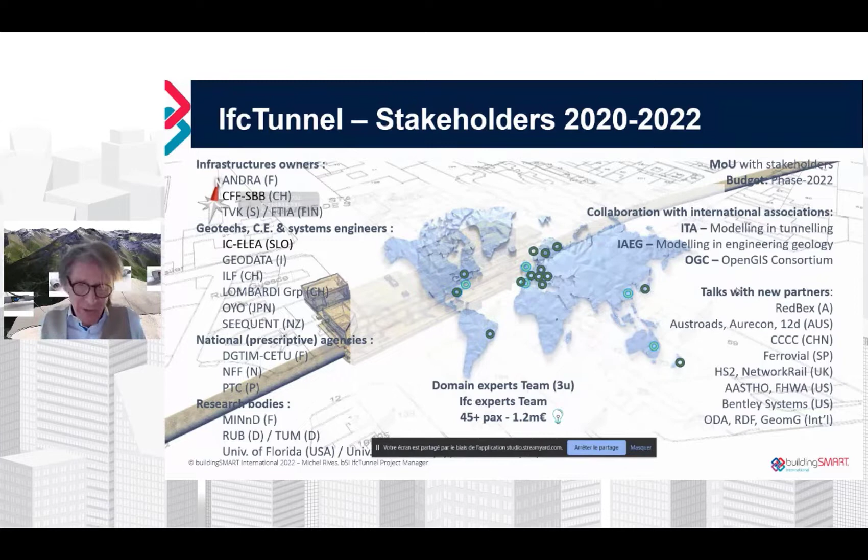I did a quick math to assess the amount of work we put into this project, and I think we are close to 1.2 million euros altogether. That gives you a sense of the effort we've put into this.

We assessed our scope on the basis of use cases, and those use cases cover where exchanges of information happen, both in terms of describing the subsoil or the lack of understanding of the subsoil, the design phases themselves, the sequencing of operation, the issue of tenders, the construction processes themselves and their monitoring, and the handover to asset management.

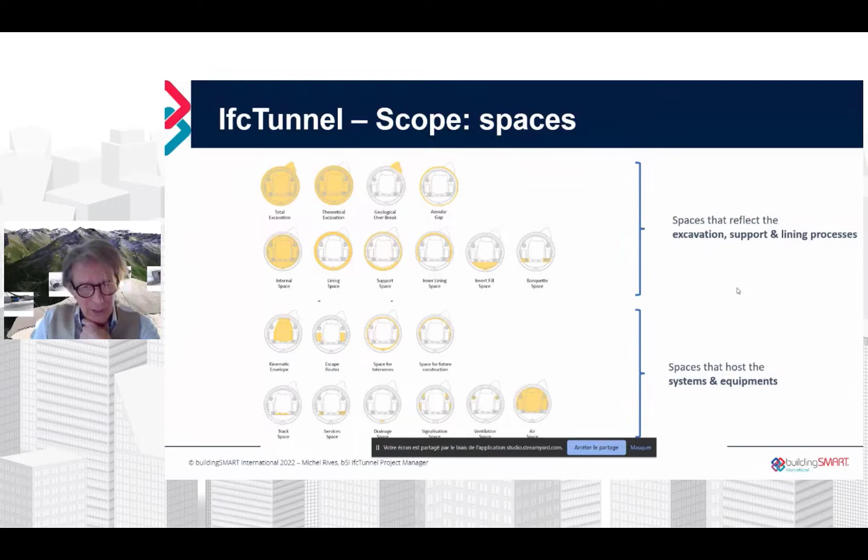So these are the basis upon which we define our scope for the three disciplines I mentioned earlier. The first thing that came to mind was to define the different spaces into which we have to organize the project. These spaces may result from the extraction or excavation process itself, or they may be planned as reservations for the different systems that have to be installed to operate the underground structure.

As I said, we have compiled the requirements of three disciplines. So all in all, you could say this is in fact three projects that we run in parallel. But I would add there is a fourth project we run, and that is the coordination between those three disciplines. Because what this project is very much about is to facilitate, to ease the exchange of information between geotechnicians, civil engineers, and system engineers. And that has proven to be difficult so far.

So we really have tried to understand the expectations and the constraints of the different disciplines so that each other understands well why it is important to provide that information.

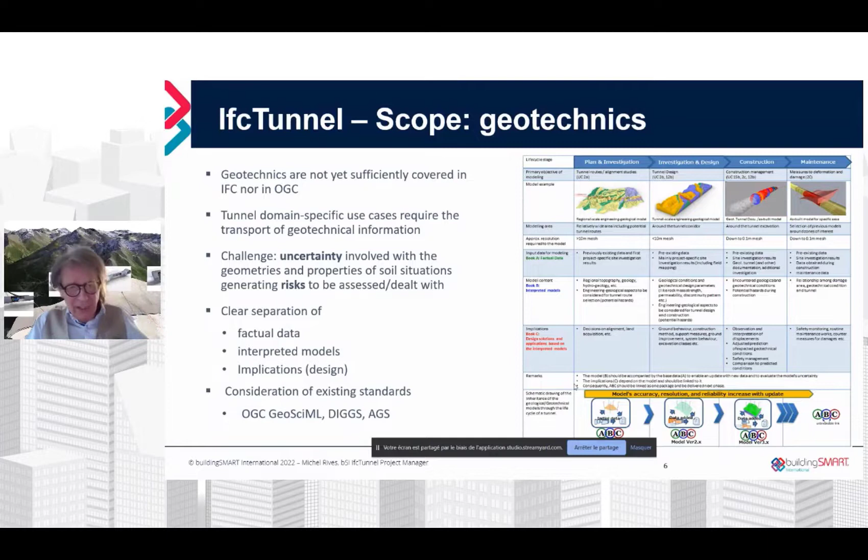Next to this, we've considered existing standards that either the OGC or other organizations have produced over the years and are being used. So we need to make a link to these.

As far as the structural design itself is concerned, we clearly decided to cover everything related to excavation, done through TBM, tunnel boring machine, or through more traditional drill and blast methods, and things that cover the so-called cut and cover structures. So this is the scope for the structural aspect of things, both in terms of what is built and how it is built, construction methods.

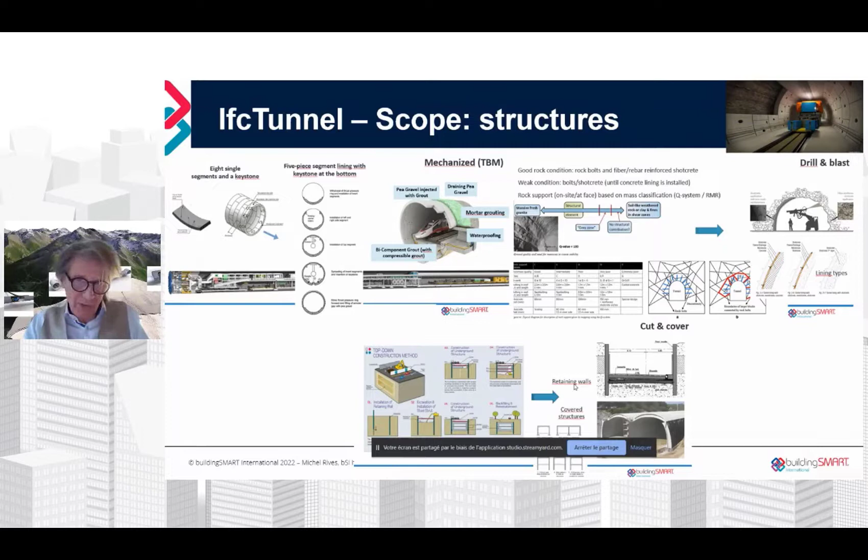As far as the systems that equip those tunnels are concerned, you have them listed here, and Heiko will be covering that later on. Everything that relates to ventilation, drainage, dewatering, fire protection, power provision, and safety and evacuation. So that's the global scope of our project.

As a consequence of the requirements expressed there, we needed to provide a few extensions as well in terms of the geometries. André will cover that. Basically, we wanted to make sure to describe properly the transition, the non-linear transition between cross sections, something that is required for tunnels, but is required as well for bridges.

So we are serving the bridge team here, the Building Smart bridge team, as well as those 3D grids, so-called voxels, which help describe a situation whereby the subsoil, for example, doesn't have a well-defined continuous limit to a particular characteristic. So the characteristics there are described through values embedded in the cells that make up the 3D grid in question. And that's a very neat way to describe things that are uncertain to some degree.

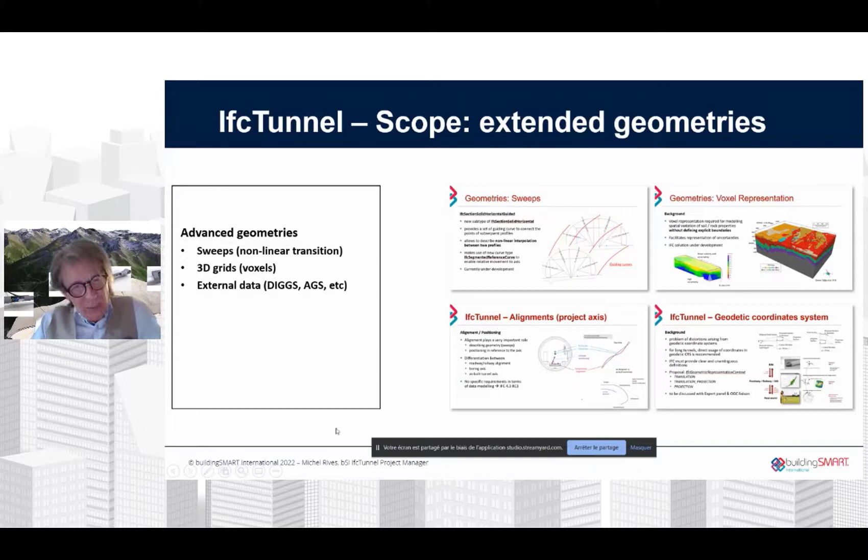That serves, of course, the underground structures like tunnels, but it serves as well foundations, deep foundations like for bridges, and deep foundations for buildings as well. So this is a rather broad, positive impact on the different disciplines. And last but not least, this idea of linking external data is something that exists today to some extent in IFC, but we want to extend it to make it more efficient. So that's another addition.

When we put those requirements together, we ran a series of national consistency checks with national industry associations, national tunneling associations. We ran this in 10 countries and got over 200 comments or suggestions.

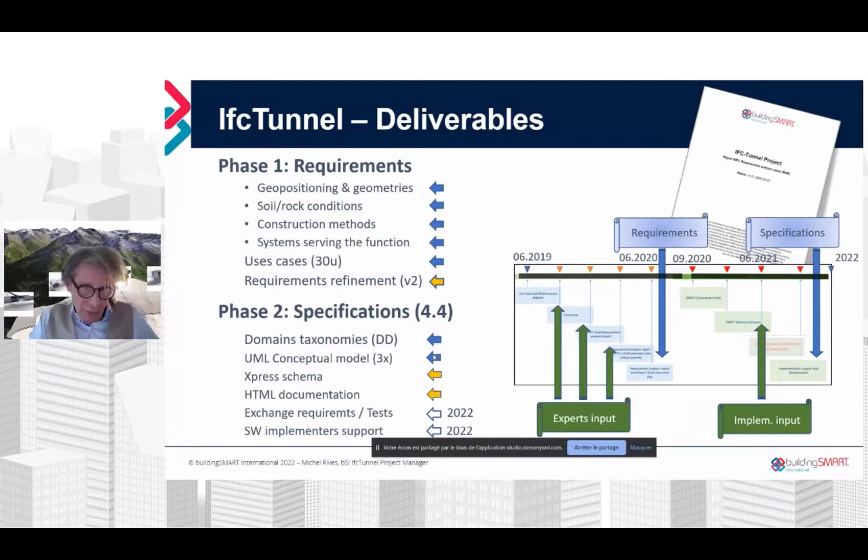As far as the deliverables are concerned, very happy to report, and this is the main topic for today and tomorrow, the conceptual model for the 3 disciplines in question that we have just polished. We had the first version by December, but we now have a consolidated version, and this is what the domain team and Lars will be taking you through. This is very consistent, but it's important to know what we have now in this conceptual model. It's been developed in UML through the Enterprise Architect platform.

This is available, and again covers all the geotechnical situations, the uncertainties associated with it, the mechanized and drill and blast excavation processes, the support and lining techniques that are used, and the different systems that equip. So all this is part of this conceptual model.

And of course, the extensions that I was referring to, but altogether, we've tried to leverage as much as possible from what was existing in IFC 4.3, and came up with a certain number of extensions that will be part of 4.4. We did a little math to compare the number of domain concepts that each of our 3 disciplines have produced compared to the railway project, which was a rather large project. You can see that this is somehow equivalent in importance, just to size the amount of work behind this project.

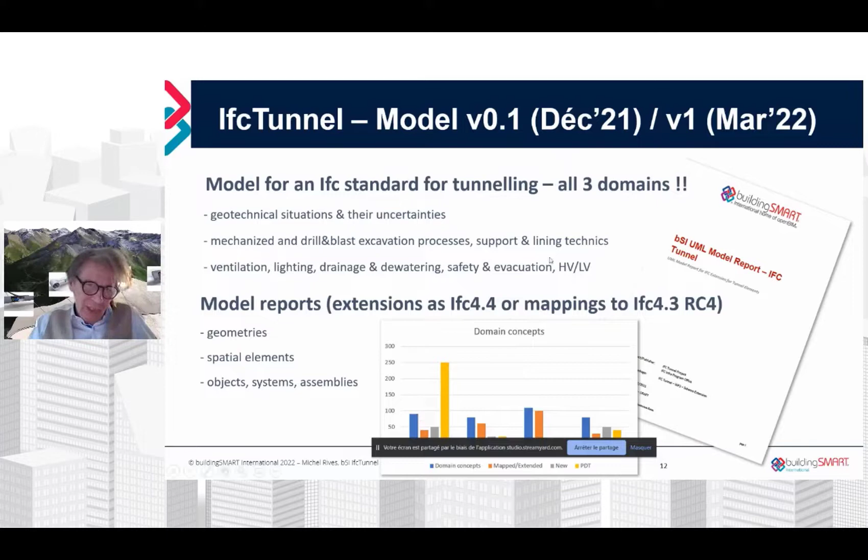So once this conceptual model is ready and presented to you, we will concentrate on producing everything that software developers need, like the express schema, things that can help with preparing the translation, and automate the input to the BSI, BSDD.

This is mainly a services platform to link classifications with the conceptual model, and prepare the different exchange mechanisms on top of the so-called alignment-based reference view, MVD.

We have as well a formal approval process within Building Smart International, and that has in a sense already started, because we've had a series of technical discussions with the SCTE committee, which makes technical recommendations for us to improve our model. We've taken their advice into consideration and integrated their wishes. So I think we are in good shape now.

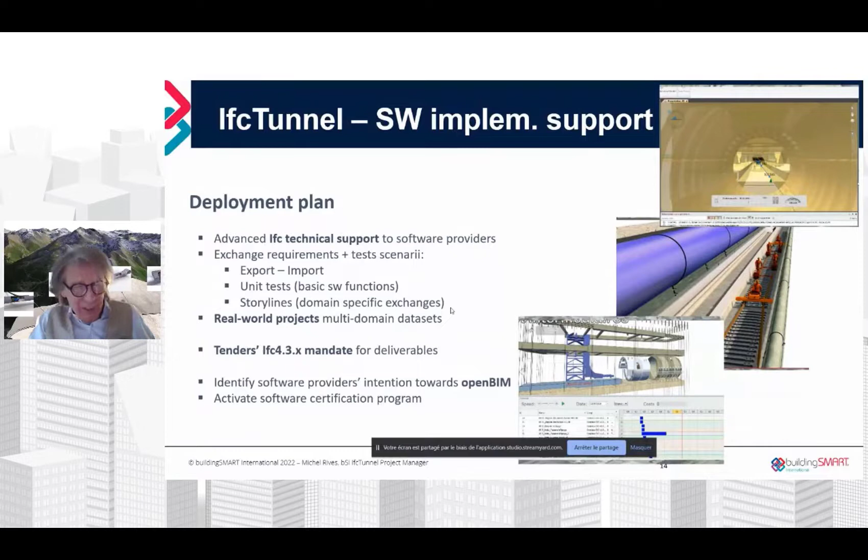And the last bit will be around preparing test instructions, data sets to help with the certification process, and of course working with the software developers by providing the data that is needed, real-world project data needed for ensuring unit tests and storylines, a bit like the railway and roadway teams have done in the past.

With that, I think I should hand over to André, and just remind you that after André, you'll have this sequence of presentations: geotechnics, excavations, and systems. We can refer to the expert panel tomorrow, which will deal more with the geometrical aspects of things. So André, over to you.

Okay, so hello everyone, also from my side. My name is André Borrmann. I'm at the Technical University of Munich, a professor, and at the same time I have the pleasure to act as the technical lead here in the IFC Tunnel project.

Let me first give you an overview of the process of IFC extension development. We typically have two different groups, and we also have them here in the IFC Tunnel project. On the one hand, we have the domain experts. On the other hand, we have the IFC experts, and they work closely together. So typically, we start with capturing the domain requirements in a requirements analysis report.

This is what has been done here as well. And then we define more precisely the data requirements, and this is still the task of the domain experts, typically represented as an extensive taxonomy. This is then the input for the conceptual model that is being designed. As we said, we use Enterprise Architect for that.

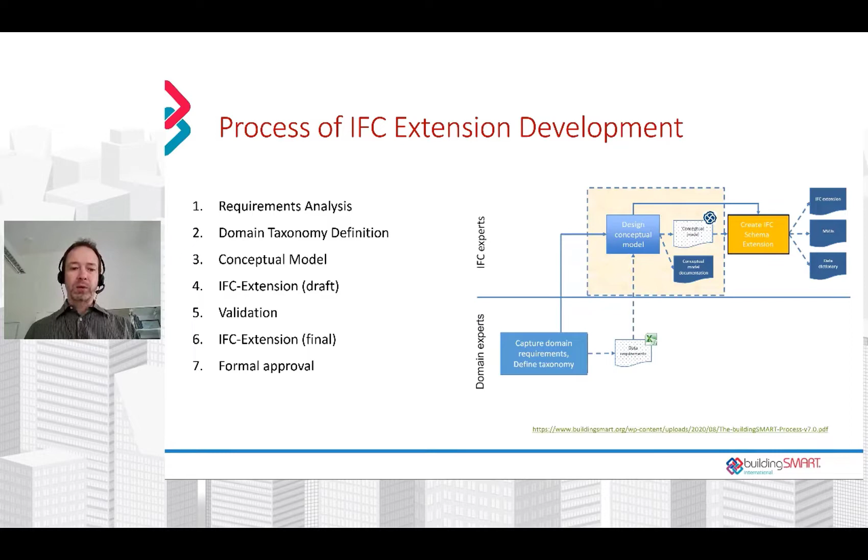So Michel highlighted this already. We started with an extensive requirements analysis report published in July 2020 with around 170 pages, where we documented in detail the use cases, the processes in tunnel design and construction, the associated data exchange scenarios, and then came up with chapters highlighting specific aspects like georeferencing and additional geometry, the role of alignment, but also a very detailed description of specific items in the different domains - geotechnics, systems, and excavation structures and lining.

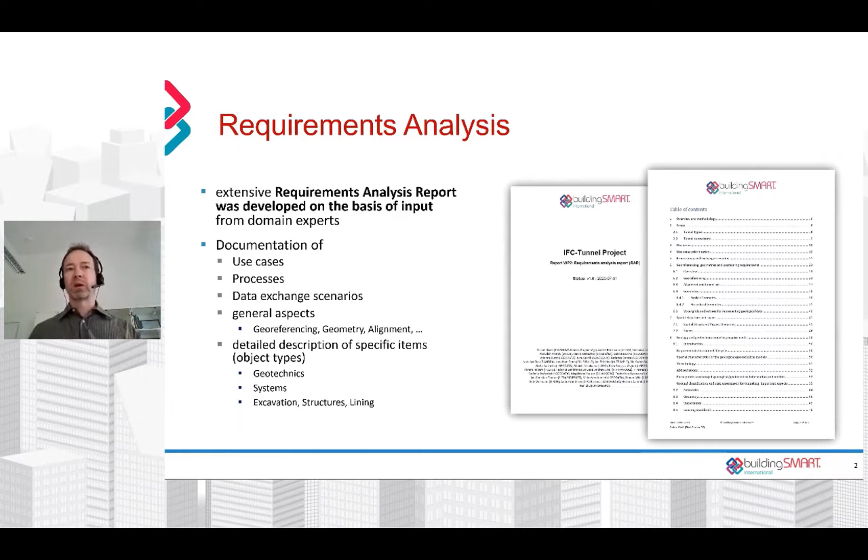This was the basis for our domain expert groups to continue their work, and they came up with comprehensive and structured compilations of the object types in the domains and their specific properties. We see these Excel sheets that have been produced, which were really helpful, and a lot of work went into them. During this process, international standards, national classifications, and object catalogs have been considered - I mentioned one from France, and also one from Germany, that have already created properties and object types.

Now having a look from a more technical point of view, we use these taxonomies and the requirements analysis report to come up with a UML model using Enterprise Architect. We make use of the UML modeling guidelines that have been developed in the infra room and also used in the railway room. From this Enterprise Architect model, we can produce UML reports that have already been created and handed over to SCTE, for example, for review.

But we can also create XMI and use this export as input for IFC-Doc. IFC-Doc is the tool we use to define the extensions of IFC. Everything we do there is hosted on GitHub, so everyone can see it, raise issues, and provide comments. From IFC-Doc, the Express Schema extension is created, and the HTML documentation is created, and we will do this several times because typically we are not done in only one iteration - we need several iterations.

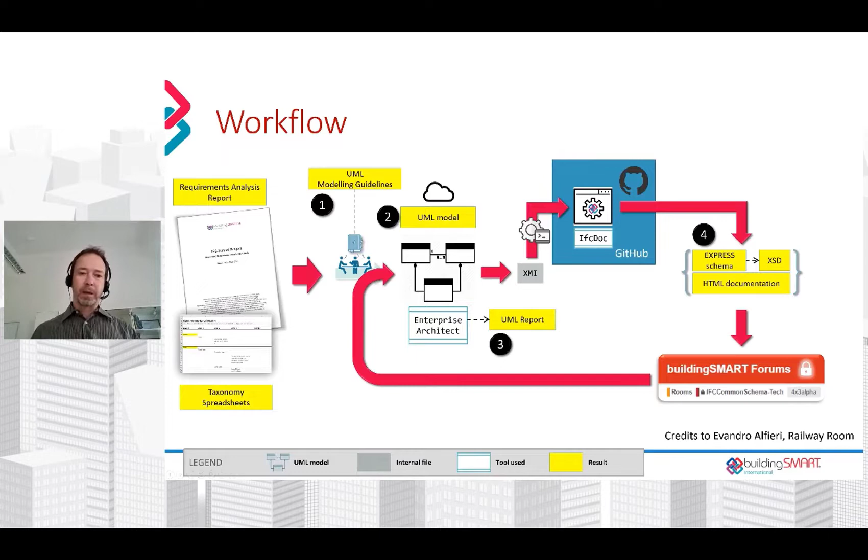So we are now already quite advanced with respect to the conceptual model - I'd say it's around 90% complete. The conceptual model is based on UML, Unified Modeling Language, which is the standardized graphical notation for object-oriented data models. We use it roughly in the way that, first of all, we directly model all the domain entities in UML and mark them as so-called virtual entities.

Then we decide to map these new entities either onto existing IFC entities, or at some places we decide to create new elements. Of course we have to be very careful because we don't want to grow the IFC schema endlessly, but still, here and there, we needed new entities.

As I said, the conceptual model is 90% complete. What we have done already is to model geometry and spatial structure, geotechnics, the structures, and the systems. Here and there a few elements are missing, but that can be completed very soon. The idea is to finalize the work on the conceptual model within the next days or weeks. So we have around 25 new entities, 50 newly defined predefined types, and around 250 properties that have been captured.

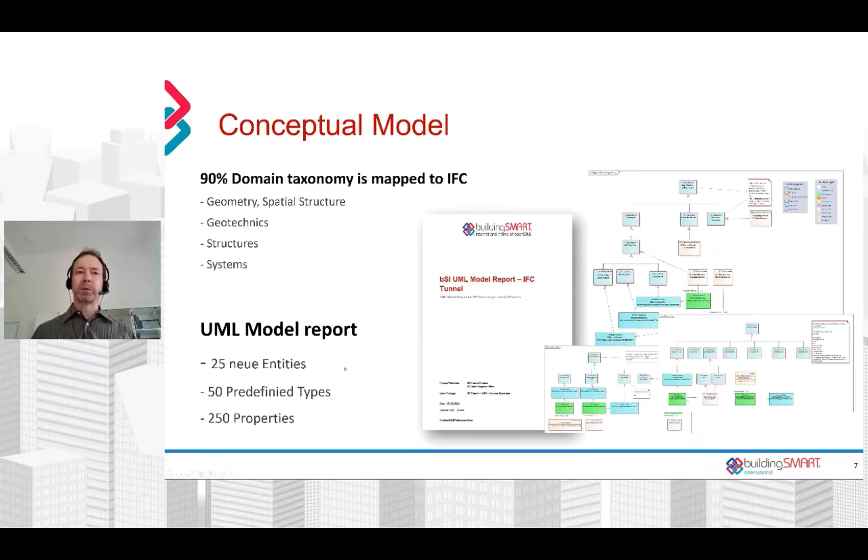So the conceptual model is now the basis to do the next step, the actual extension of the schema. We use GitHub quite intensively, the BSI InfraRoom repository, where you can follow all our work. We use this to discuss with other experts like the BSI bodies, the international community, but also to exchange with experts in the expert panels. You can use these links listed here to directly access the repository.

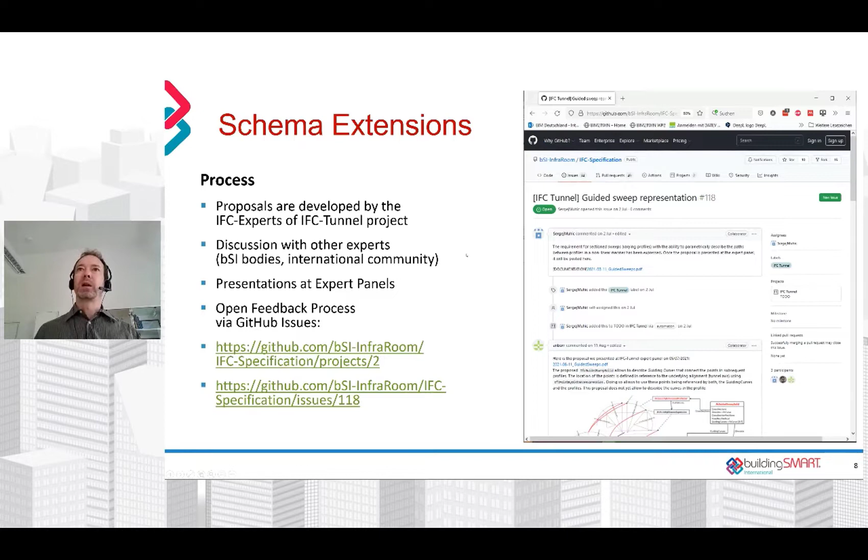So what is the schedule for the overall project? We started in 2019. Then in summer 2020 we delivered the requirements analysis report, which was a lot of work to compile all these requirements. Then both the domain groups and the IFC experts started the conceptual model development. We had the very first alpha version at the end of last year, and we will deliver the final version of the conceptual model very, very soon.

So now we have already started with the schema development. We will continue to do so until, I would say, summer or early autumn this year, and then would have a first candidate standard for IFC 4.4, which will include the extensions for IFC tunnel. And then we probably will have a deployment project where we help and support vendors in implementing these new data structures, giving them support for that.

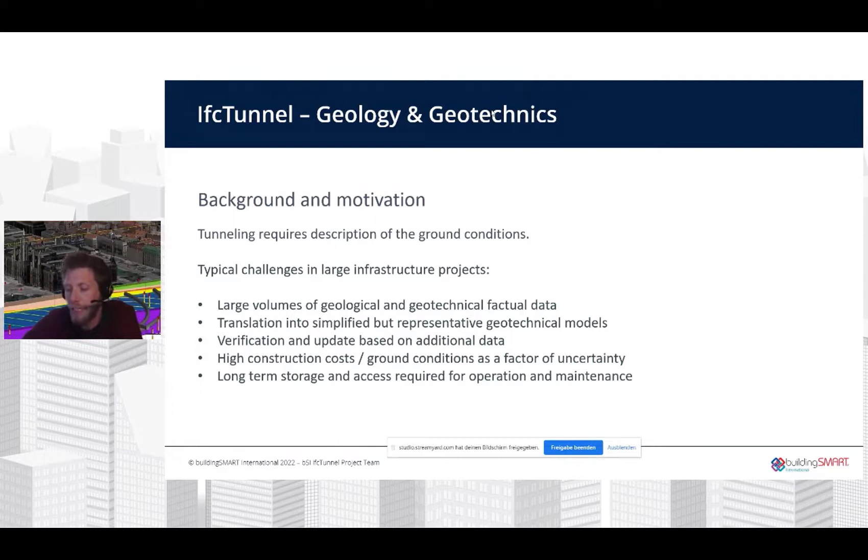During that time we gain even more facts, more documentation and information that we need to bring into the model and compare it to the prediction. Why is this so important? Of course, the ground conditions, due to this uncertainty, are a major factor of uncertainty for the whole project regarding costs and project time. So for this reason we need efficient ways to deal with all these challenges.

We heard a good introduction about the IFC Tunnel project and our activities. From my side, just a bit more focus on our tasks. The requirement analysis report that Andre just mentioned included a detailed description of the use cases we are going to support.

We almost finalized the conceptual model, as Andre just said. This schema extension, our work, also includes some concepts to deal with uncertainty, which as I said is a very important fact for us. Regarding geometrical representation, something quite new for IFC will be the voxel models - we're going to talk about that. And for us, a major challenge or requirement is to define a good link from a model of the ground conditions to the design. I will show you the concepts we have for this in my following slides.

Regarding the input, some brief overview - maybe you saw this in previous summits and presentations. We collected input from many existing standards, and one very important source for us was the standards by OGC. There's still a back and forth with this. This is something from the requirement analysis report where we described what was already covered and where we see a need to extend the data schema. We did the same analysis for the existing schema extension from 4x3 for geotechnics, where we still see some gaps that we would like to have filled for tunneling applications.

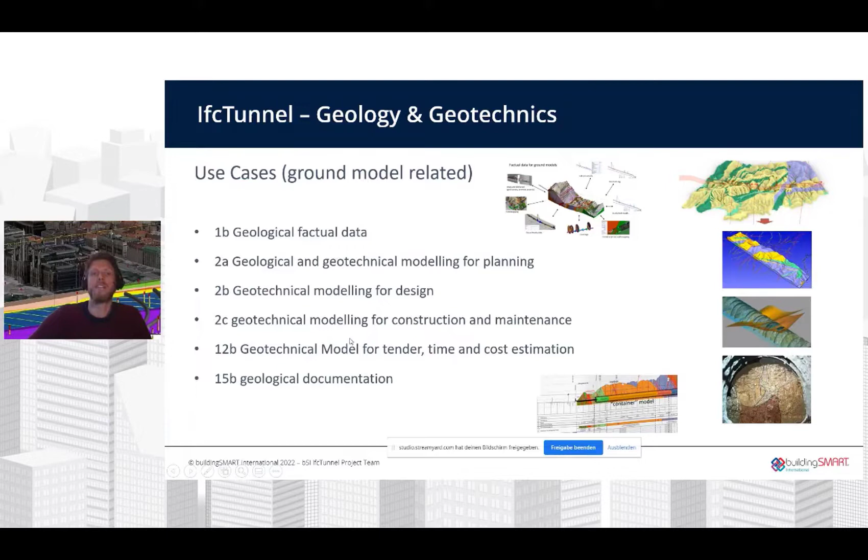To repeat it quickly, we focus a bit on geofactual data. I will explain later why this is so important to you. And then we have several use cases throughout the lifetime of a tunneling project. I would like to summarize this with some examples in the following slides. Very important for me now is to show the focus.

Based on this use case descriptions, what do we think are the essential needs for the schema extension? Very important is the support of factual data. Factual data for us are any observations and measurements regarding geology and geotechnics. So it can be lab test results, borehole data, any other kind of test results that are collected, field mapping—anything where we have confirmed knowledge that we need to localize in our model and that we need for further assessment.

And why do we think that IFC would be a good option to produce or exchange these data? We think there's no existing established standard that carries both the geometry and the semantic model and properties to these observations or to these geometrical objects. So we think having IFC as a tool for this would be very helpful for importing the data for further interpretation and also using existing software for visualization.

So we need a base for spatial assessments and visualizing this data so that we can continue working with it. And of course, we always need to show where the confirmed information is.

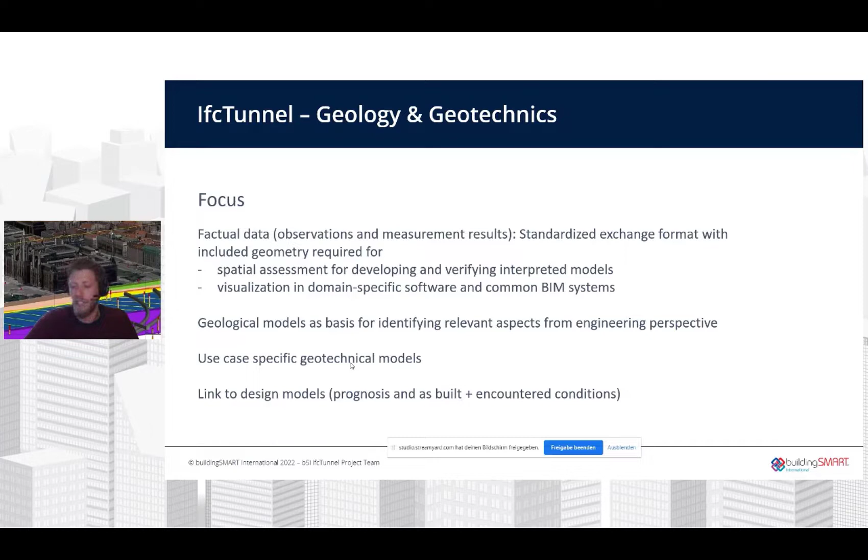Starting with this overview—as we just heard, factual data are most important for us. They show us existing knowledge. This can be geophysical surveys, boreholes, test results from different sources, in situ testing, lab testing, field mapping data, and a lot of existing literature, maps, and so on. All of this is compiled to form our interpreted models that fill our model space, for example along a tunnel corridor.

We see here geological units. We see major fault zones that have been modeled along this alignment. So these models describe the ground where our project is located.

But in the next step, we need to relate this to the design itself. So we see here an example. The classical approach to this is a longitudinal section—that is what is commonly produced by geologists in a tunneling project. Once the alignment is fixed, or once there is at least one alternative for the alignment, the geologist would draw a longitudinal section and describe the major features that are relevant from his perspective, maybe fault zones, contacts between different layers, and so on.

What you usually include in such a prognosis longitudinal section is a band—a line below the drawing that indicates the key properties along a certain part of the alignment. And we are going to adopt this approach in a BIM model. So we say we can split the alignment into certain intervals based on the expected geological, geotechnical conditions, and then supplement this part of the alignment with attributes that describe these key factors relevant for design at especially this part of the alignment.

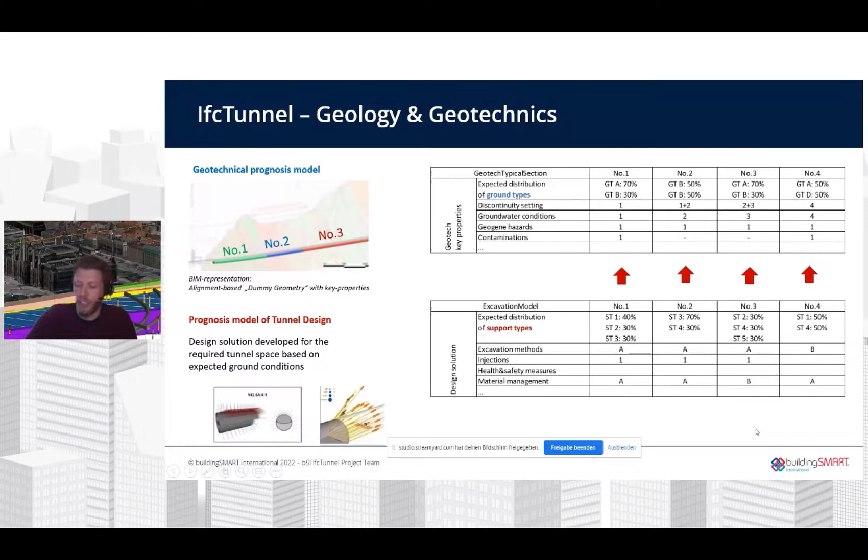There might be gas occurrences somewhere, and this can be described efficiently with such a model of zones along the alignment. The designer can have a corresponding model that can be used for a cost estimate, that can be used for any permit, and that can be cross-checked against the encountered conditions. That's the next point for us.

Once the project has started, we collect a lot of information. Usually you have geologic documentation during construction, so everything you predicted will be checked now. For every round you blast in a conventional tunnel without TBM, you might document discontinuities, groundwater inflow, and the distribution of certain materials in the tunnel face. This can be checked model-based against your prediction model.

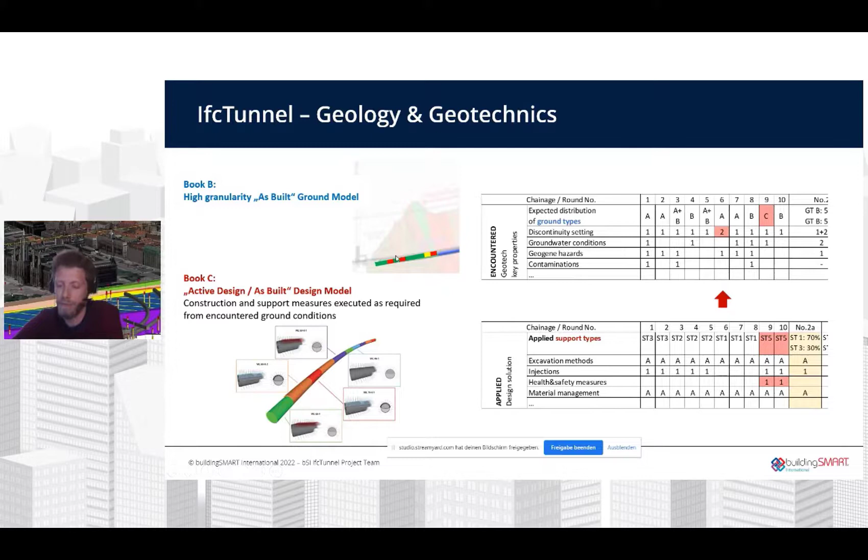And you can easily compare expectations versus encountered conditions. Of course, the same applies for the design. Based on these conditions, certain support types are installed, certain measures are executed, and the design model develops along, the as-built design model develops along with the as-encountered geology model, let's say. So this is describing a workflow that we have in mind.

This brings us now to the requirements for the model schema, or the conceptual model. This model is generally subdivided into two parts. We distinguish factual data described in Book A, that's our working term — so everything that is measured or observed and included in the model belongs here. Then we have Book B with interpreted models, with layers in between these points of observation.

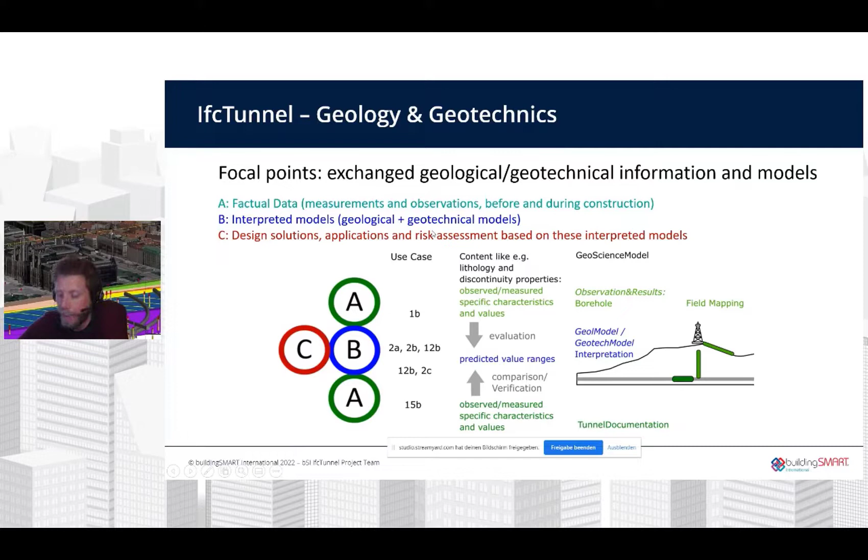As we just saw, Book B and the essence from Book A and B can be linked to Book C, which includes the design solution, and is also the place where risk assessments and things take place, because they are related to the building already. So that's our starting point. I'll briefly list the key elements that we expect for Book A and B before I hand over to Lars, who shows you how this looks in the conceptual model.

For Book A, we started with a collection of domain-specific typical types of data. Typical information we receive in a tunneling project has been subdivided into classes and is covered now. This includes objects that need to be related to a certain geometry, and others that are just semantic elements, like for example test results. We can have many test results related to one sample, and the sample might have the location, but the test results have to be linked to it.

One important point for us is that we are dealing partly with very extensive data sets, partly with well-established comprehensive standards for exchanging this information. We need an option to link external data sets. This applies especially for very big data sets, like very detailed logging data with geophysical methods, or machine records from drilling rigs or drilling jumbos in tunneling, so borehole data. We don't want to bring all information into IFC, but we also need a chance to link external things.

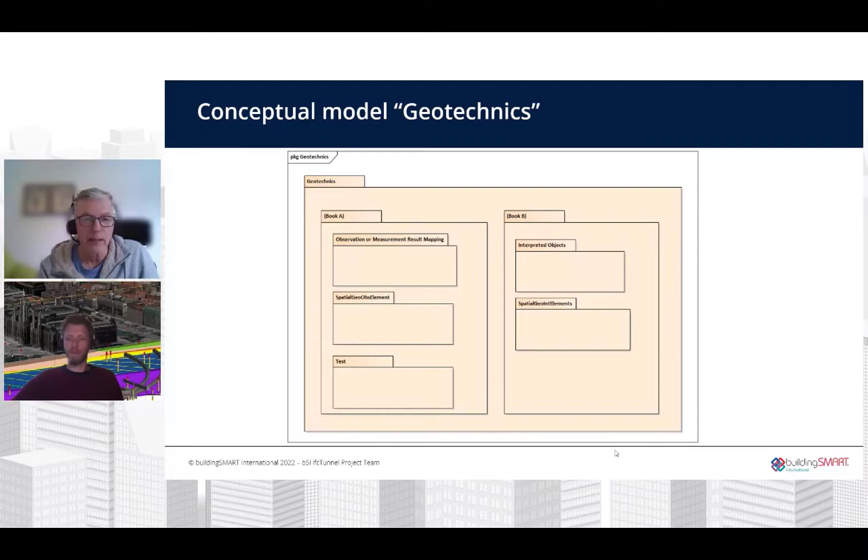And you can click a couple of times, Jonas, there is, I think, some animations here. So this is just to give you an impression on how to read these UML diagrams.

So we take the next slide. Yeah, sorry, this is very, very small, I see now.

So from Book A, you have certain containers that carry the information, for example about observations. And in there you have, for example, boreholes. IFC borehole is something that already exists in IFC 4.3, but we introduce maybe a slightly wider meaning, since it now can be the carrier of these observations.

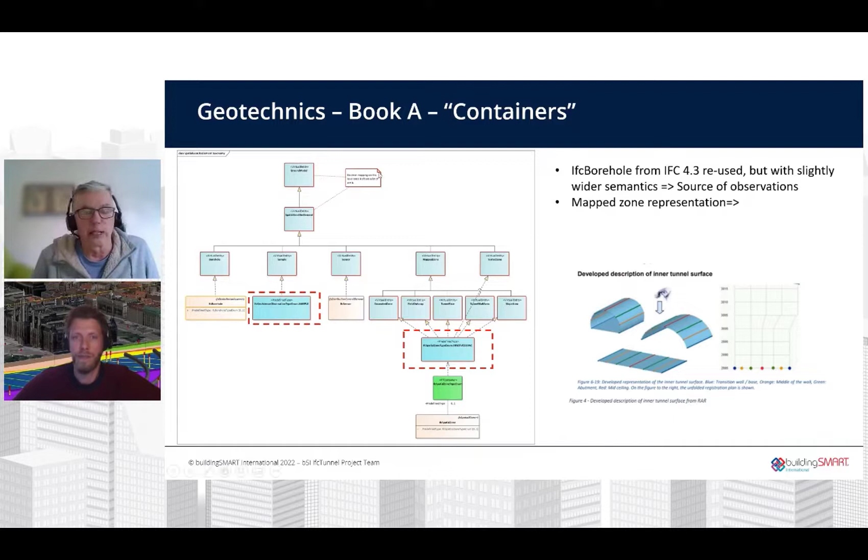There was one thing I was trying to add here for the borehole. For borehole, we might have very extensive data sets that we cannot push all into the IFC file, as we agreed. So we are going to support 3 options. We can have a very simple representation in the model, like just a shape of the whole borehole and reference to external files, but we can distinguish observations on the borehole.

This could be interval representations, and these can either use property sets defined in the IFC schema, a very simple one for general logging data. But we are also eager to link this to more sophisticated existing ways to transport logging data, and use it to link existing files like AGS files or any other file that describes these observations along a borehole for a certain interval or a certain point. Because we know there's so much existing standards with very extensive data sets, we are eager to have this option supported.

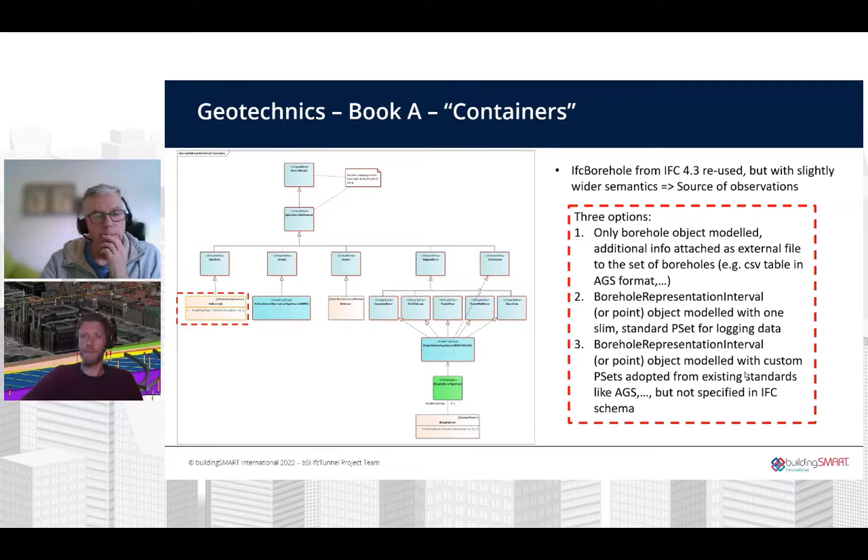And then I jump on. So quite small again, but anyway, in there we have the observations, and first of all, on top we have two main types. We have a borehole data representation subdivided into more specific classes like borehole construction, geolog intervals, and different things. And then you have observed objects.

In this case, there will be a slide later showing what we have actually done with the observations. But for the observed objects, we have selected to introduce a whole new concept in IFC, which is an observation. And these different types of observed objects are then defined as predefined types for that entity.

And regarding the borehole data representations, we have the IFC borehole as an object, and our proposal is to use, like Jonas showed in the previous slide, either predefined property sets or external data to represent this kind of information connected to the borehole in that case. So I assume we can go to the next slide.

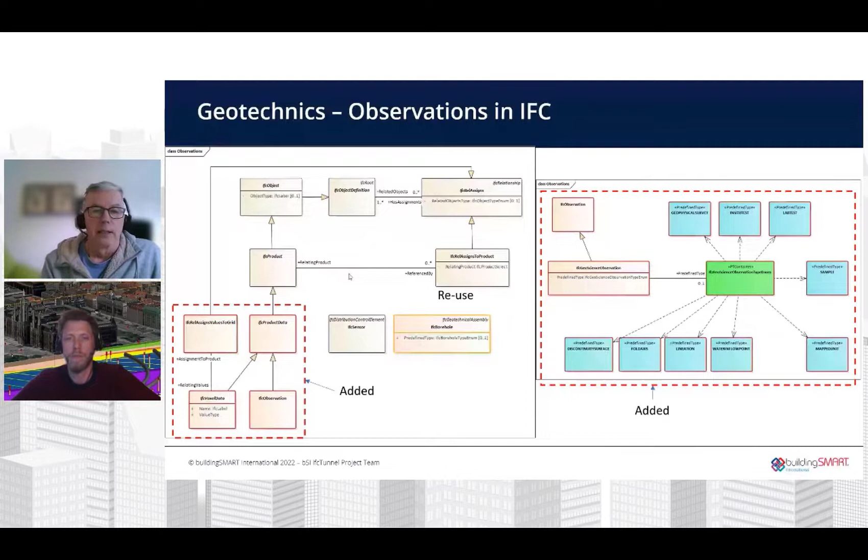And for that, we then define a couple of predefined types capturing the requirements from the domain, the different types of observations that you can define and use in IFC. And of course, as any other object, these observations can carry information such as property sets or external data, if you like. So I guess we can skip to the next slide.

That's the next one, linking to an example. So I would like to briefly show what we, from the domain side, have in mind to do with it. So we heard that we have this spatial observational elements, for example, a mapped zone.

A mapped zone is for us any location or any place where we make this observation. This can be the tunnel face during execution of a project, but it can also be a field outcrop, it can be a cut slope, or it can be a trial pit where the geologist goes and makes mappings and logs discontinuities. So we see here an example of this observational element, the place where we make the observations, and then we link these predefined types of observations to it.

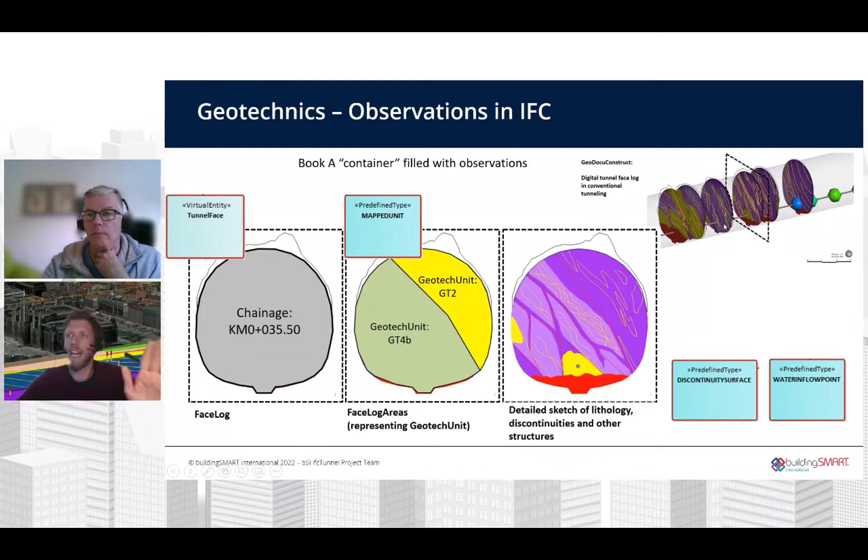And this can look like this. The tunnel face is the mapped zone, as we call it. On this, we have mapped units. That means we have a patch where we observe a certain material. That's a mapped unit here and another one here. And we might also have discontinuities that have been traced somewhere, that have been measured with a compass. We have water inflow points that have been documented in the tunnel, and so on. So these are types of observations that are attached to a certain place where we make the observation. And this can be, of course, not just a tunnel face, but any kind of outcrop where the geologists make these observations.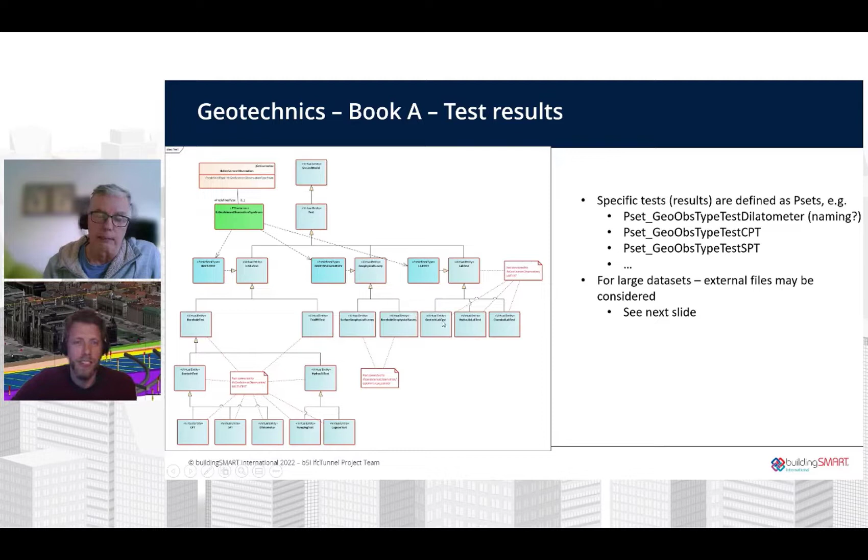And you could also have external data, which we can see on the next slide what we did with that. Sorry about the small text here, but what this is trying to convey, there is already an existing structure in IFC where you can reference external documents, but documents, to most people, are sort of possible to render by a machine, but they are meant to be understood by humans. So we actually propose to add a parallel structure there, where we can also reference external data sets, using the same mechanism as is already in place in IFC. And we propose to reuse the same structure for metadata, for example, if you would like to have that as well. I think this will be presented a little bit more tomorrow.

Yeah, so I think we can skip further. Now we come to book B. Yeah, and this is also me, right? Yes, so book B, we have a similar structure.

We have these what we can call containers, in this case models, and these containers can then contain interpreted objects. So I guess you will have to read, Jonas.

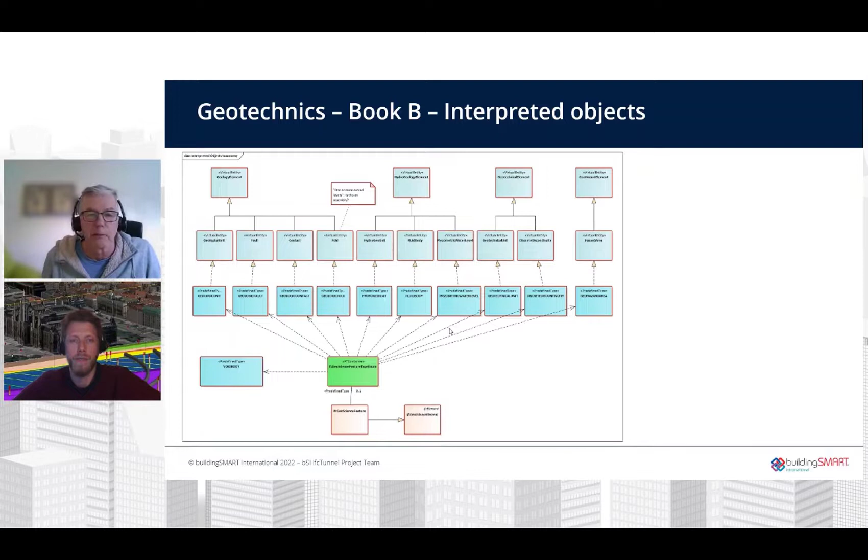Yeah, from here we have another overview. This is a compilation of the things we've added. On a high level, we have IFC product data that I talked about, with observations, and also voxel data that will be elaborated tomorrow. For observations, we add geoscience observation. And on the other side, we have geoscience models and geoscience features for the interpreted data. So that's a simple picture showing the essential extensions to IFC that we propose.

I'm not sure about the order, but we're getting back now. I think we can skip this, this again shows this was just a compilation of the things that are new in IFC. I think the slides will be shared anyway, so people can look at it in detail.

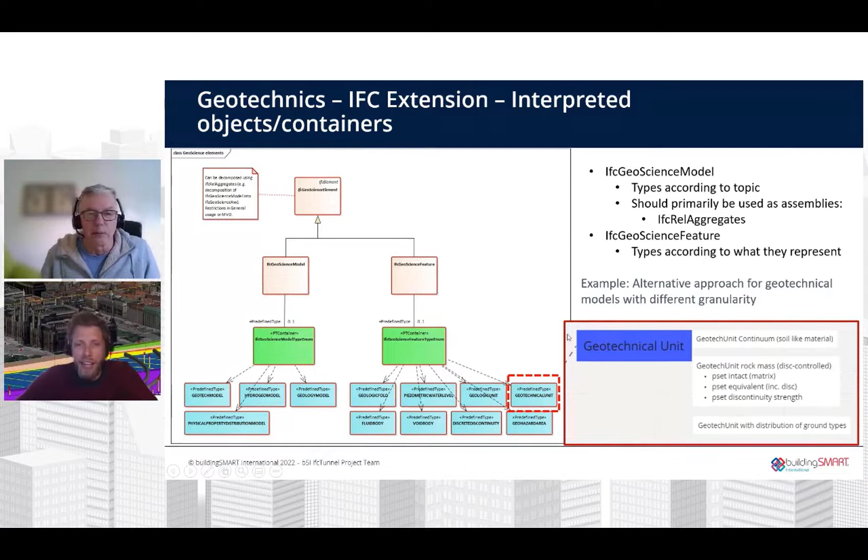Yeah, and I think we're done. At this point I would just say, from our perspective, from the domain people, something most important is that we have the geotechnical unit. This would be one of the geoscience elements that relates to a geoscience model, to the geotechnical model. This is something that classifies the ground into certain materials.

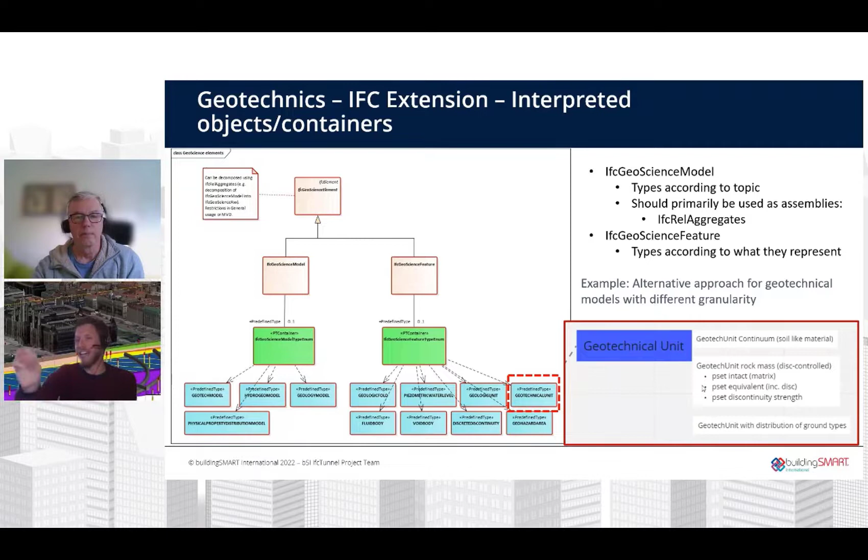And here we have several property sets depending on the material - if we're talking about soil, or rock that is controlled by discontinuities, or if we cannot tell in detail where the strength is or how high the strength is in a certain part, we might just give an envelope and say in this part we have these kinds of materials. So this is a quick overview to show what we're going to do with these elements.

So we are going to support with this geotechnical unit several concepts to distinguish the ground material. We can either do it in detail and model every layer with a geometry, with properties of layer B including compressive strength, shear strength, stiffness parameters. Or we don't do it, and just model this green part in general, saying we have these materials, and the rest can be found in the geotechnical report or external documents. So we want to give the modeler freedom to have these options, but to deal with the uncertainty we have, and the difference of knowledge for certain parts of the project.

And uncertainty is the last slide - this is just an outlook. We cannot tell in detail, but we're really working on a typology to say which types of uncertainty we have in the model. We're working on distinct property sets, for example for geometric uncertainty. There's also such an approach in the existing IFC 4x3 schema, and we're going to adopt this a bit, but also extend it to describe other types of uncertainty not so much related to geometry, but more to characteristics, and uncertainty in a certain property, because there are a lot of existing mechanisms in IFC that we'd like to make use of in these geotechnical models.

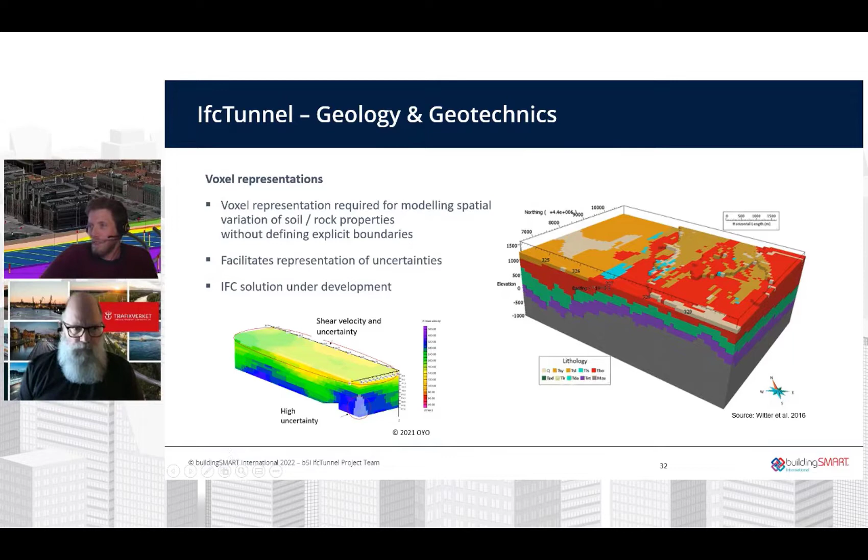Yes, my name is Jan Thorén, and I work at the Swedish Transport Administration in Sweden. I will be presenting some of the domain expert work we have been doing within the area of excavation, support, and tunnel lining. So you could say this is what comes after Jonas' presentation, after the geology and the rock data and the investigations - this comes when we start a project with taking out the rock and supporting the rock.

So this presentation is mostly covering the requirements that we have identified within the domain team. We will be talking about the actual domain aspects from here, and then Lars will cover it from the IFC perspective in a separate presentation afterwards.

Generally, excavation has a large variation of methods, systems and solutions, but they share the same principle design. On the ground basis, it's a way of taking away the rock using different methods. There are different ways of supporting during and after excavation, and different ways of waterproofing and building a final tunnel structure.

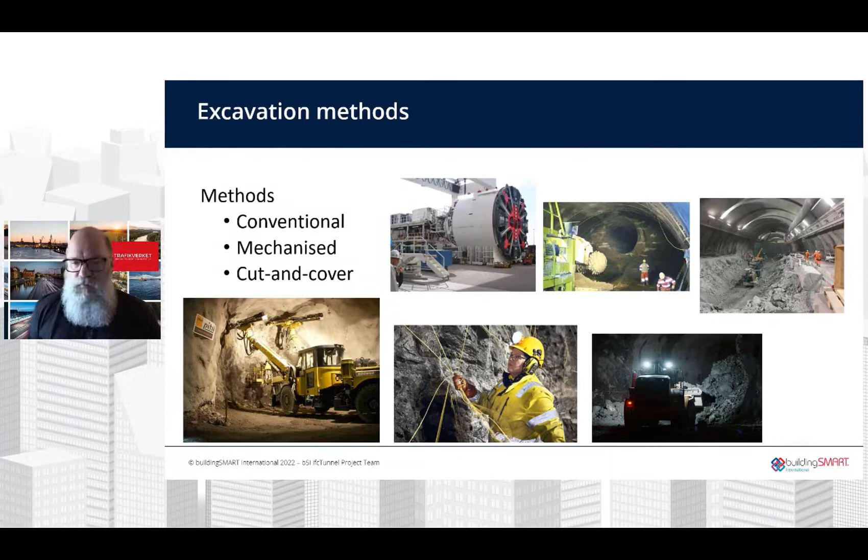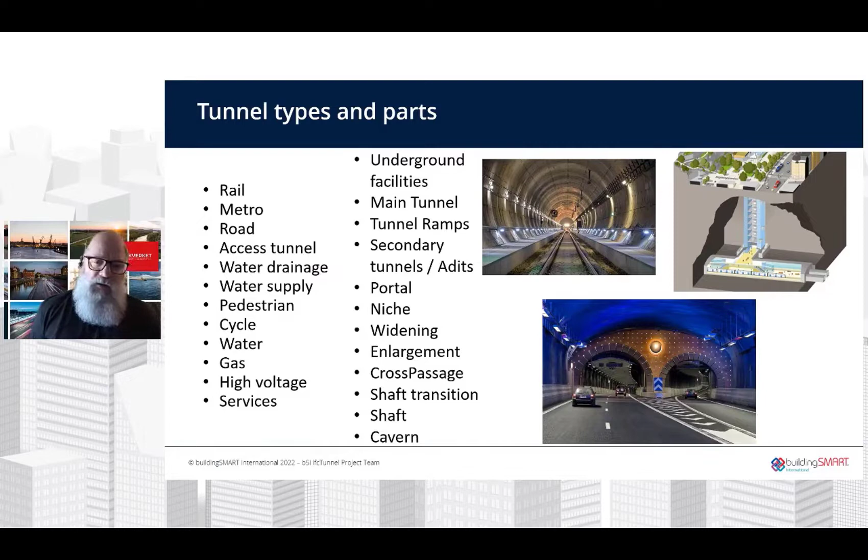Different tunnel types and tunnel parts that we cover in the report are, of course, different functionalities of the tunnels. Parts of the tunnel can be for roads or for rails. There are also different tunnel types, so we can see ramps, adits and portals, niches, cross passages, and so on. We try to cover them all in the requirement report.

Different parts of the tunnel depend on how you do the blasting, and there's a lot of terminology and different methods that we try to cover and talk about in the report. That will be properties at a later stage. This is also connected to the space question and also connected to actual details in the design.

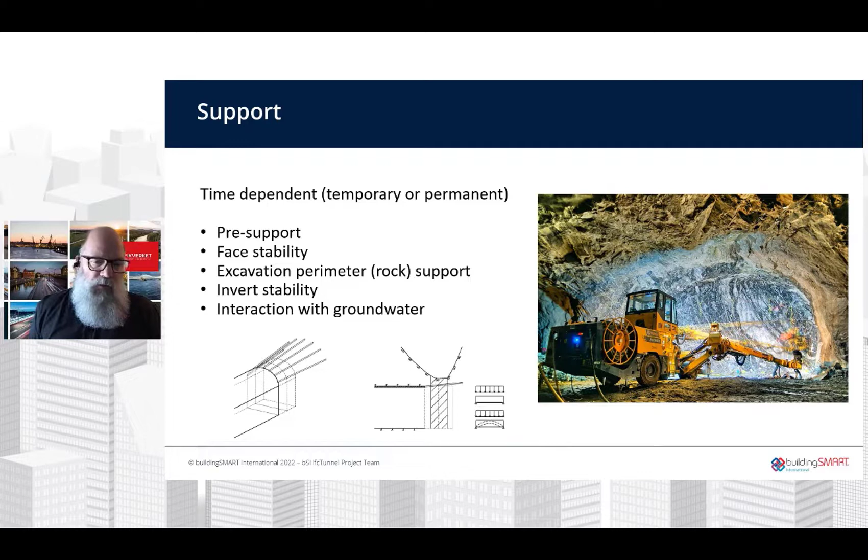Permanent support is usually done radially around the rock. You see some more examples of that.

Other things included are injection grouting, dewatering and drainage. We also have been talking about cast concrete, and all these different types of reinforcement or support are usually done when you have soft rock conditions.

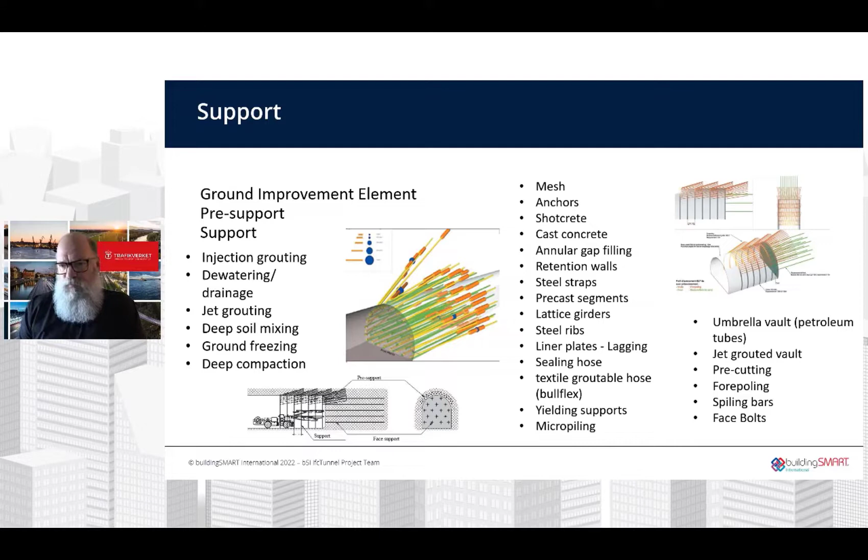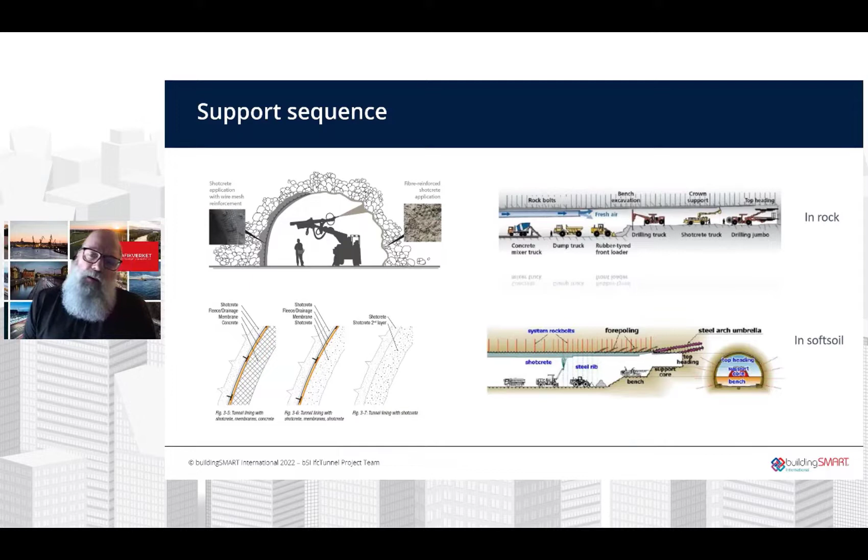Here you see some examples of shotcrete done in different layers, depending on the scenario, and also an example of excavation in a hard rock scenario or a soft soil scenario where you have much more pre-support and forepoling.

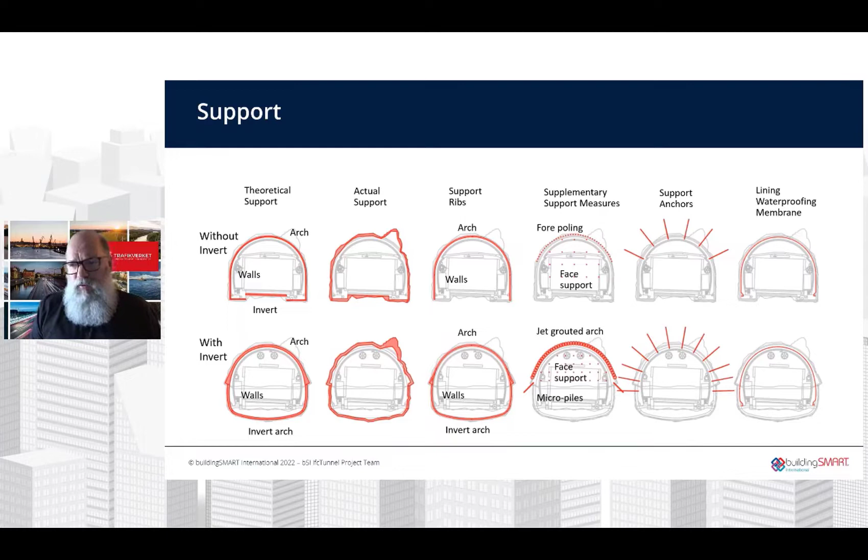There are some other pictures talking about the terminology, from the theoretical to an actual scenario where you combine it with bolts and anchors and lining in the scenario. We have some more pictures about lining.

This can be done with precast elements. It can also be done in cast concrete. I have some more examples later on this.

More examples of precast elements in one or two layers, with different types of methods and different types of systems, you could say.

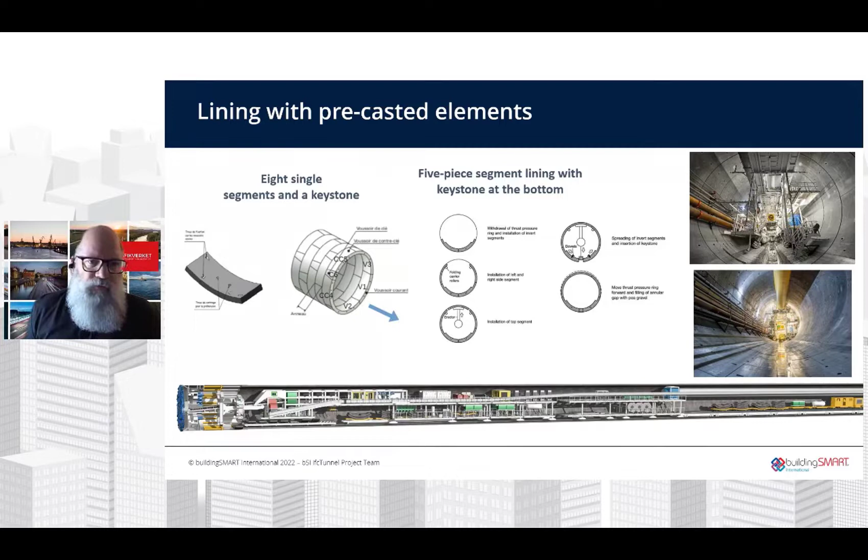Even more on this scenario, and even more here. You have joints and gaps and waterproofing and stuff like that. That is also a component within construction.

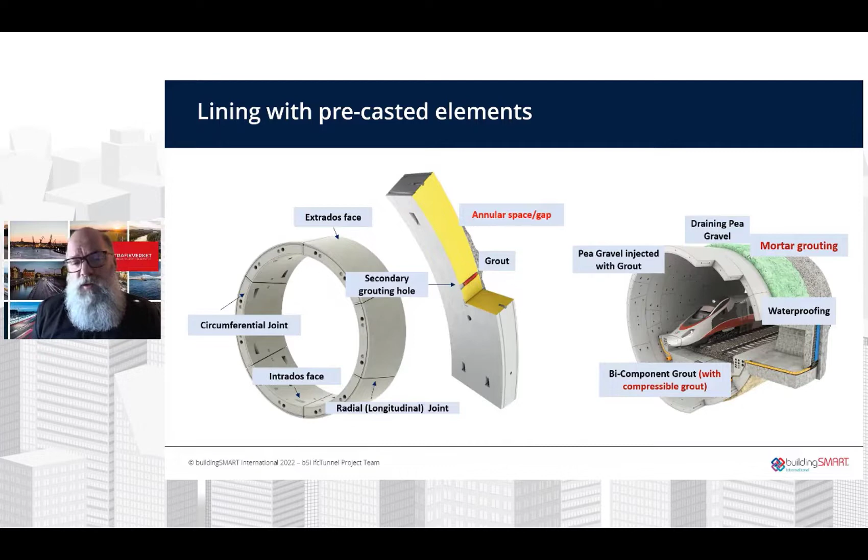These are some examples of different types of excavation support and linings that we covered in the requirements report. Now over to Lars to see how we modeled or worked with it from the report.

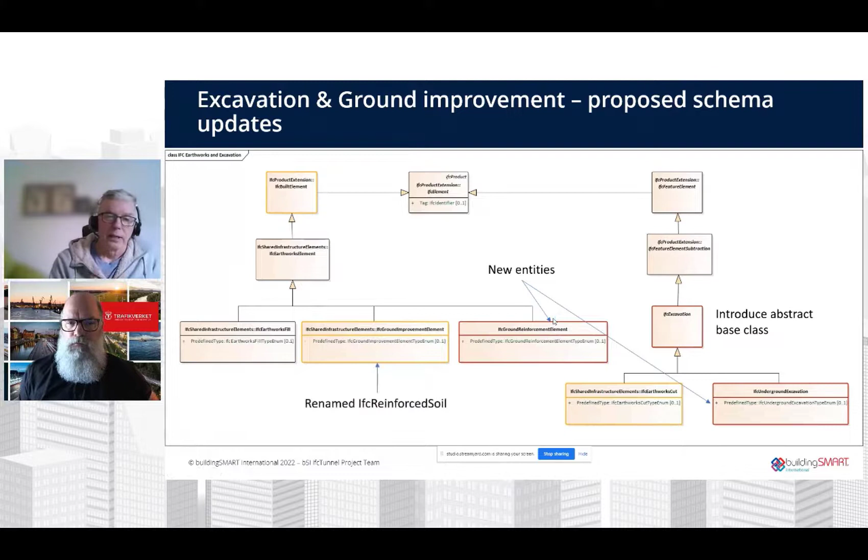While I'm on this slide, I should also mention that in IFC 4.3 we have an element called IFC Reinforced Soil. But while working with the excavation domain for tunneling, we found it would be nice if we could rename that element to Ground Improvement Element instead, shown here with the brown border. Ground improvement is a more generic term, so we propose to take that definition and rename it to also include ground improvement when the ground is not soil. As you see here, we also propose to introduce a ground reinforcement element as well.

So we have Earthworks Cut here with all the existing predefined types, things like dredging, topsoil removal, trenching, pavement milling, and so on. We had a generic excavation predefined type. What we propose to do is add a few more special types of open excavations, which are braced open and anchored open excavation.

For underground excavation, we propose to introduce 2 predefined types to cover all those mentioned here, like full face excavation, pilot bore reaming, profile widening, reprofiling. One is face excavation and one is radial excavation, covering the longitudinal or radial directions. There was also something in the domain taxonomy called staged excavation, which we consider as taking the temporal dimension into account, and we propose to use existing IFC mechanisms for that, using processes, for example.

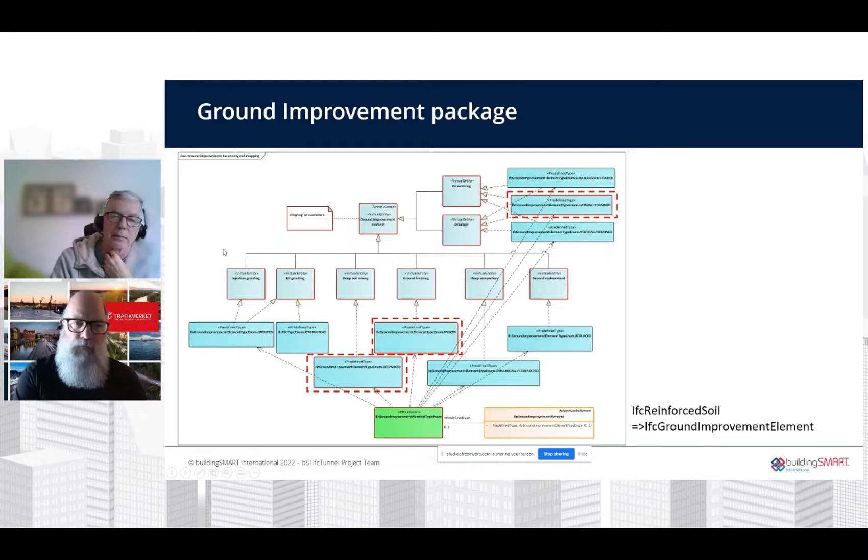So we go further into the ground improvement package, and here, as I said, we have proposed to rename this reinforced soil element to IFC Ground Improvement Element instead. By doing that, we can reuse many of the predefined types already defined, and add a few more to cover the requirements from this group. Both dewatering, drainage, and also ground freezing and deep soil mixing were not already covered, while ground replacement, deep compaction, and grouting were already covered, as we saw with this reinforced soil element.

I can skip that. For pre-support, one thing I might mention is that some elements we saw in the taxonomy reoccur in different contexts. So what we propose to do is introduce a couple of predefined types for IFC built system. Systems in IFC are a grouping mechanism where you group elements into a system, and the system captures the functional aspect that this group of elements provides. For example, we propose to introduce a pre-support system in which you can group all these different kinds of elements that participate.

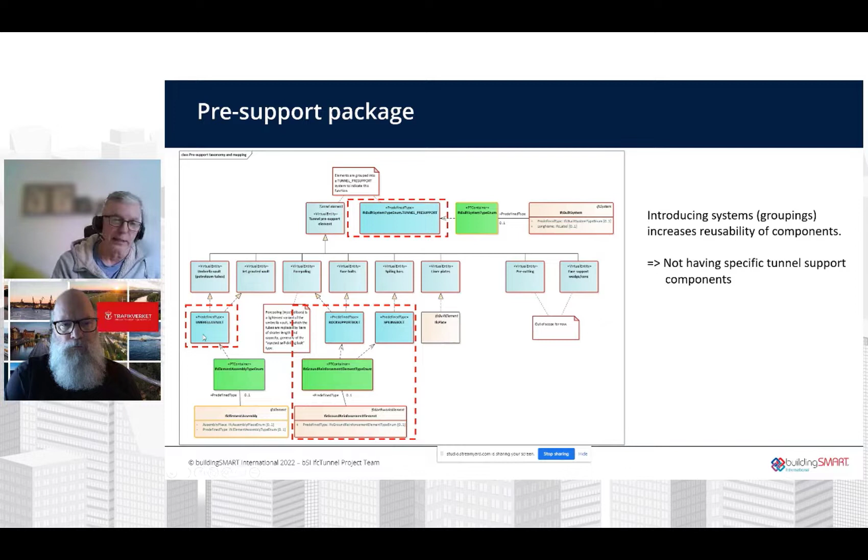For some elements we can reuse existing IFC elements like plates, but we also added new elements like the ground reinforcement element, where we have rock support bolts and spiling bolts, for example. We also introduce a new predefined type for element assembly, which is this umbrella vault, which could be seen on the previous slides from Jan Christian.

So these are schema extensions for this part, pre-support. And when we come to support, again, we propose to introduce another built system predefined type for this.

Regarding the individual elements, we had meshes, shotcrete, and cast concrete. Discussions about these focused on what we want to model primarily, which are the physical elements and the systems. Materials in IFC, as you might know, are something sort of separate in the model.

For example, for meshes, we have IFC reinforcing mesh already. We have elements that can be used for shotcrete, maybe like IFC covering, but we have also added an IFC arch element as a subtype of IFC built element. There is already an arch type for IFC element assembly, so this new IFC arch would serve as more of a unitary element. So you have the possibility to model arches both as unitary elements and as assemblies.

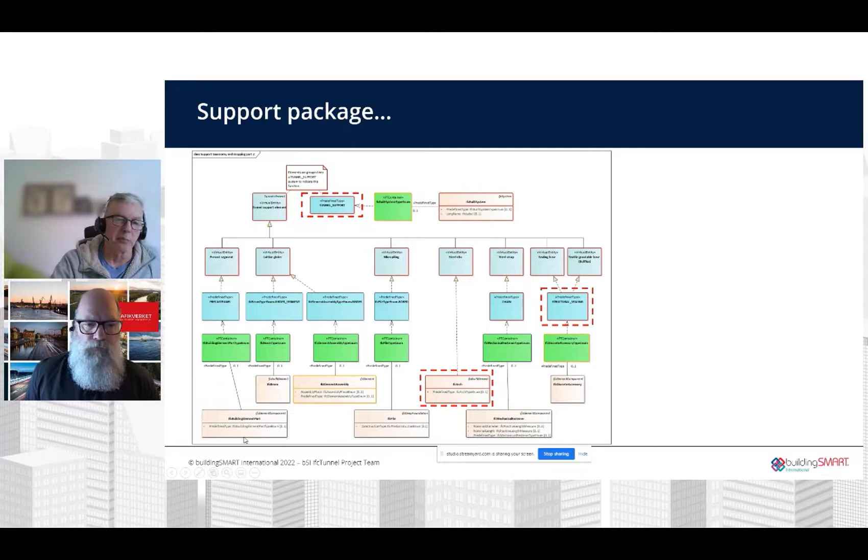So again, a couple of schema extensions for IFC, for support, tunnel support. Not too much anyway in there. I see I'm running out of time slightly. And lining was very small here.

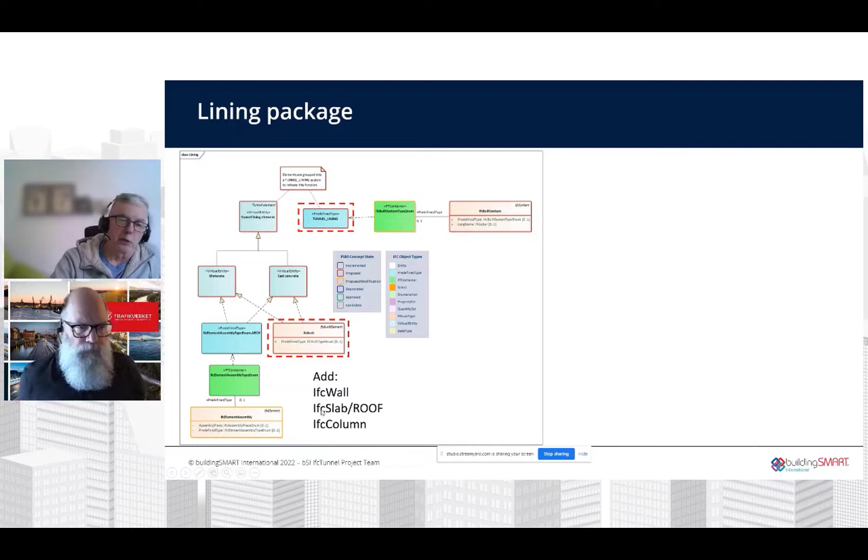Again, we had a built system for lining, where we can use arches either as unitary elements or as assemblies. Here we should also be able to use things like walls, slabs, columns, and so on, which are also existing elements in IFC.

In a separate package, we also add waterproofing as a kind of built system. Here we can reuse existing things like membranes in IFC. But we actually added two things, and I'm not the expert to explain this fully, but we have a water barrier which can serve as a kind of barrier where you can compartmentalize the tunnel to isolate water issues to compartments.

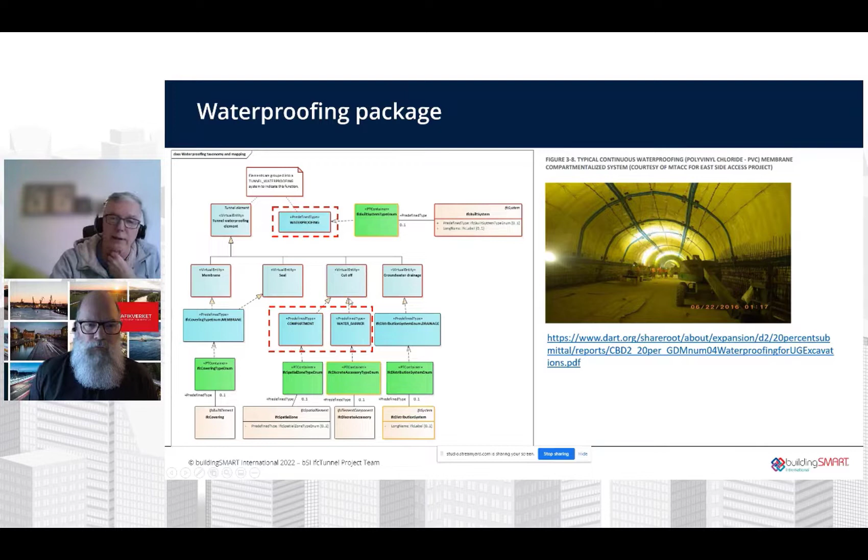In this case, we added a water barrier type and also a type of spatial zone, which is this compartment, sort of very generic, but you could use it for what is called cutoff in tunneling for waterproofing. Yeah, I have one minute left.

We also had an interior package from this group, and here we have a lot of elements where we can reuse what is already in IFC, things like partitioning walls, handrails, stairs, ladders, doors, and manholes. All those things already exist in IFC. But we had one thing here, invert fill, which is another predefined type for this new fill element that we added.

Then we have things like ventilation, which will come later in the systems presentation. We have signaling also in the systems presentation, cabling, earthing, drainage also in systems. We had this duct bank, which appeared only here, and here we propose to add a duct bank predefined type to element assembly.

And then last but not least, one thing I'd like to explain: we have carriageway and track here to the right as parts of the tunnel interior. What's worth mentioning is that things like carriageways and tracks are actually part of the road and railway facilities. In IFC 4.3, we have separate facilities for tunnel, bridge, road, railway, and marine facilities. So the carriageway or track should, in IFC terms, be a separate facility that travels through the tunnel. It's not the tunnel itself.

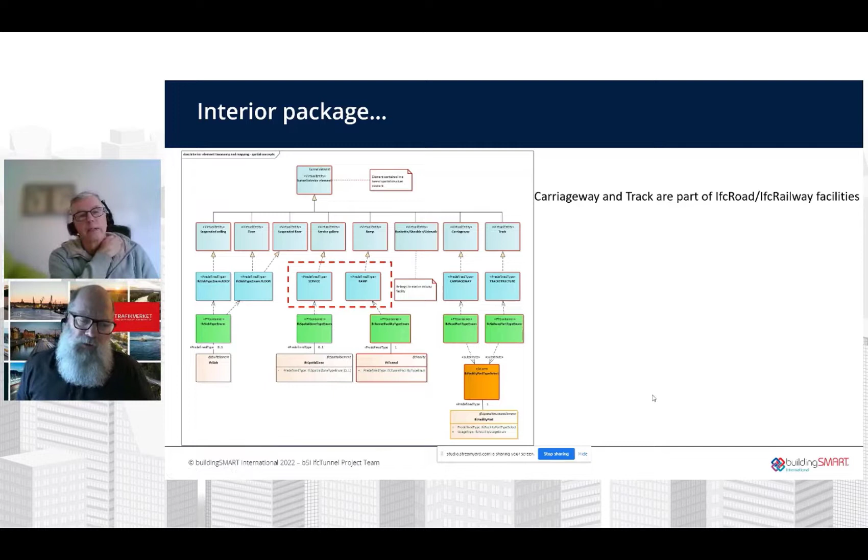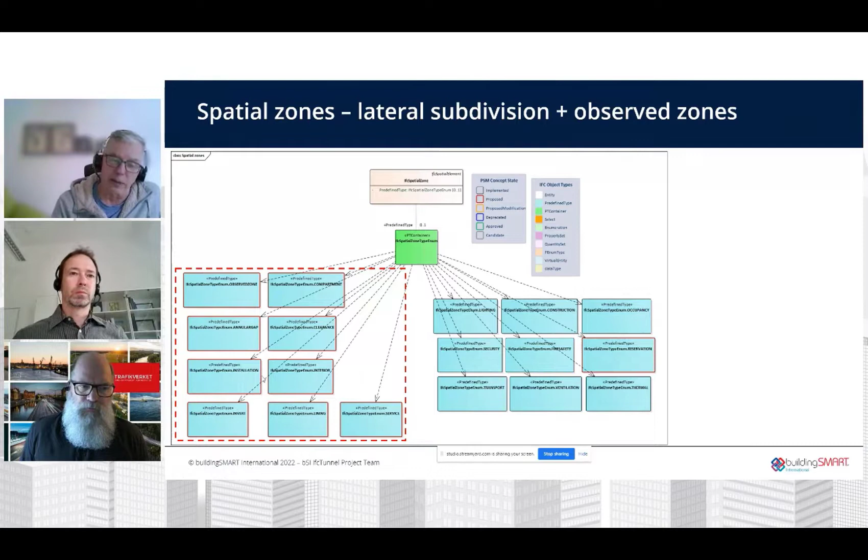I think I should stop there so we can move on. A little bit about these tunnel types: we talk about cross passages, access tunnels, shafts, and other types of tunnels. That will come later in the definitions of spatial elements. Due to time restrictions, maybe we can mention that tomorrow. We have added a tunnel facility with different tunnel types, and facility parts the same way as for road, railway, and marine facilities. We have also modeled the more lateral subdivision of the tunnel facility or tunnel parts, but there's no time to go into that now. We will take that later on. Thank you.

That's a good call, Lars. Thank you for that. Thank you, Jan Christian. I see we have Andre and Heiko with us. Okay, yeah, that should work.

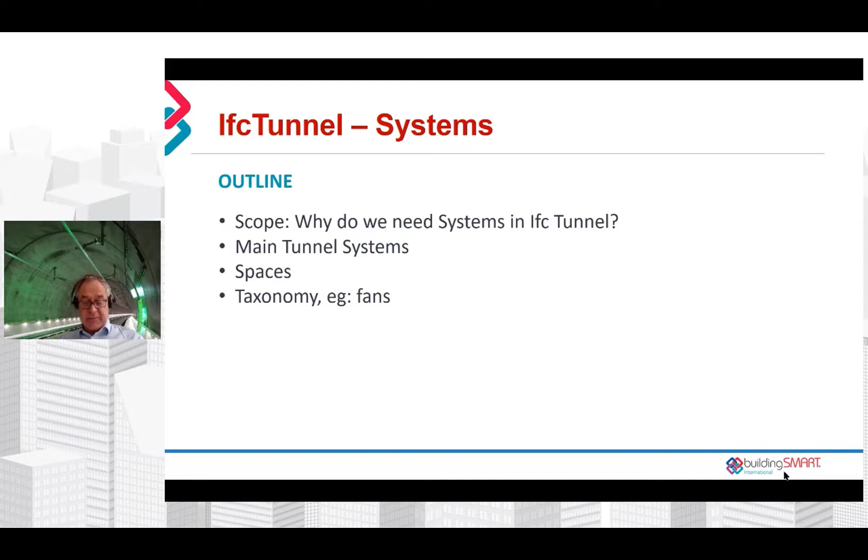I present briefly the following topics: why we need systems in tunnel, an idea of the scope, the main systems in the tunnel, an introduction to the spaces, and an example of the taxonomy for fans.

To the scope: tunnel systems are an essential part of tunnel construction since they might influence the conception of the entire system. Therefore, for these components of functional systems, we need an exact description for the semantic and geometry to include them correctly in the general model.

In our working groups, we focused on those types of tunnels that are most spread across the world and most interesting for the stakeholders. The same applies for the tunnel systems to be considered. Together with the type of tunnel, mainly connected with its usage, the excavation method, construction type, geology, and geotechnical model, technical equipment plays a major role for tunnels since they ensure safe operation and maintenance. It should be observed that most of these systems are also required during the construction phase, even in a different or temporary capacity.

Tunnels are highly equipped with a number of different technical systems. They are necessary for operating the tunnel, and some are already necessary in the construction phase. The considered subsystems are power supply (high voltage, middle voltage, low voltage, excluding traction - that's mapped by IFC railway, but with earthing), then SCADA or supervision, communication, ventilation, lighting, fire protection (passive and active), safety and evacuation, and groundwater drainage or carriageway drainage. These subsystems have been integrated into the existing IFC schema, and if necessary this will be extended - Lars will report on this later.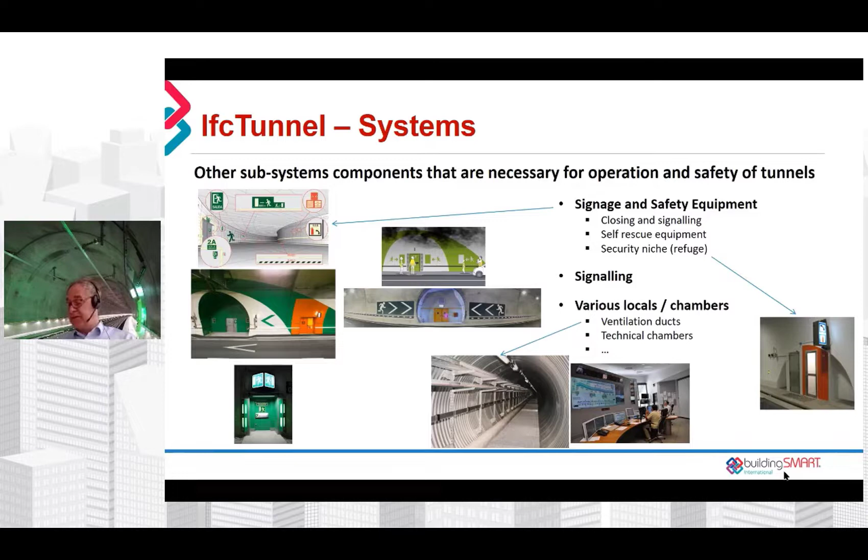How we worked: we looked to get an agreement on elements and object types to develop a draft conceptual model and a draft schema extension. Important is to get property definitions that are large and complete, but will allow local variations. All should be amended in the IFC schema.

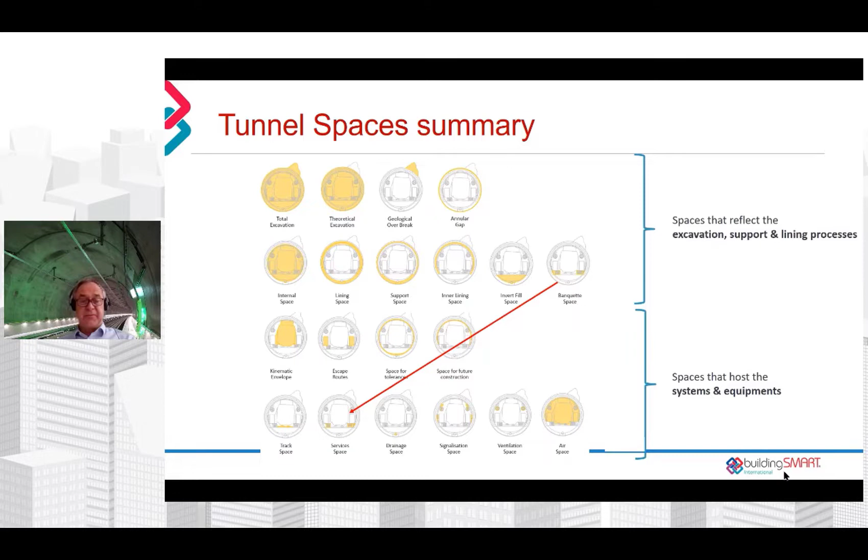In work package 2, our work package, some work has already been conducted to create a tunnel taxonomy related to systems - creation of the technical vocabulary used in the context of tunnel engineering, maintenance, and operation. Mapping the identified IFC entities has been started last year and continues to the end.

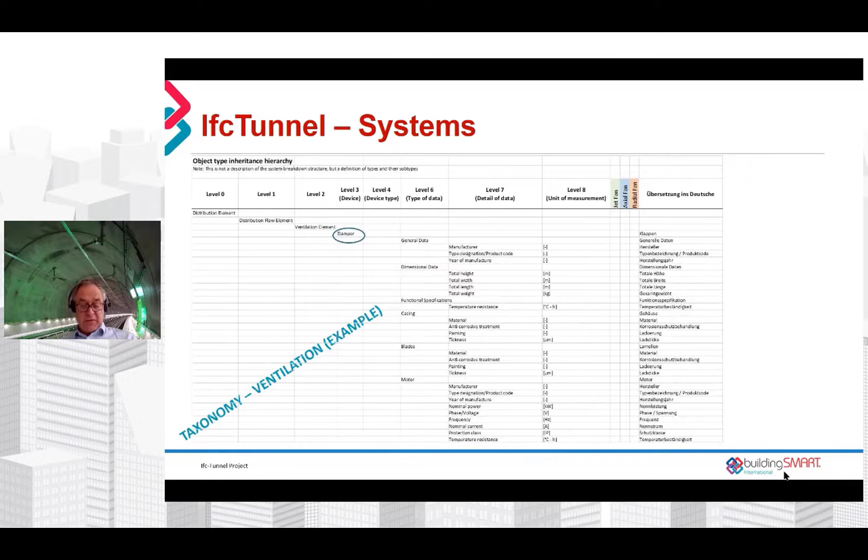Not all attributes are required for all fan types. We have illustrated this for the IFC experts for the software implementation. We also looked for all components belonging to a fan, like damper or sensors or air ducts.

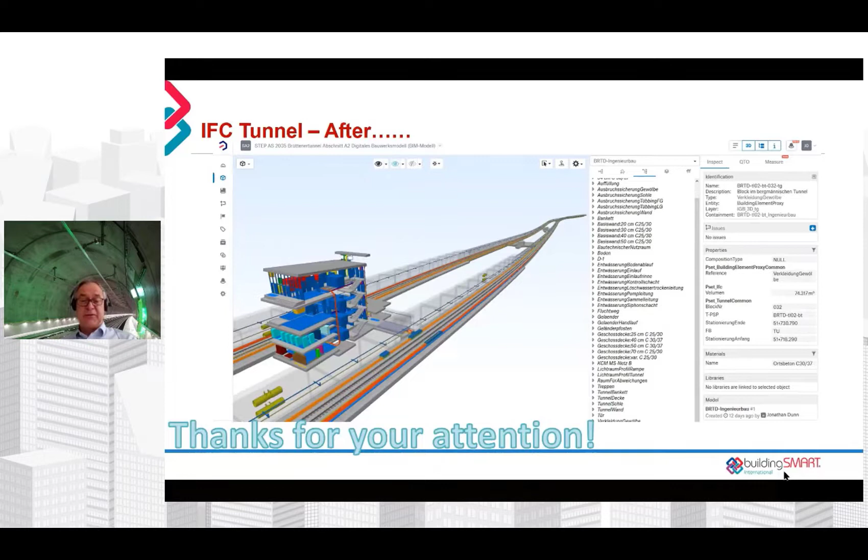Thanks, Heiko. That was great. I think Lars is back with us. Yeah. And I think you're going to share your slides. Here they come. Okay, I think you recognize these kinds of slides now, so I will bore you for a couple of minutes more with these. Good thing is that they look very similar, so if you understand one, you can understand them all, even though it might become a little bit boring during a presentation like this.

So I'm now going to present the work we did with the conceptual model for the systems subdomain. In a similar fashion as before, we have subdivided this into a couple of packages: earthing elements, power supply elements, safety elements, ventilation elements, and then firefighting and drainage elements in one package. Then we have a separate package for systems.

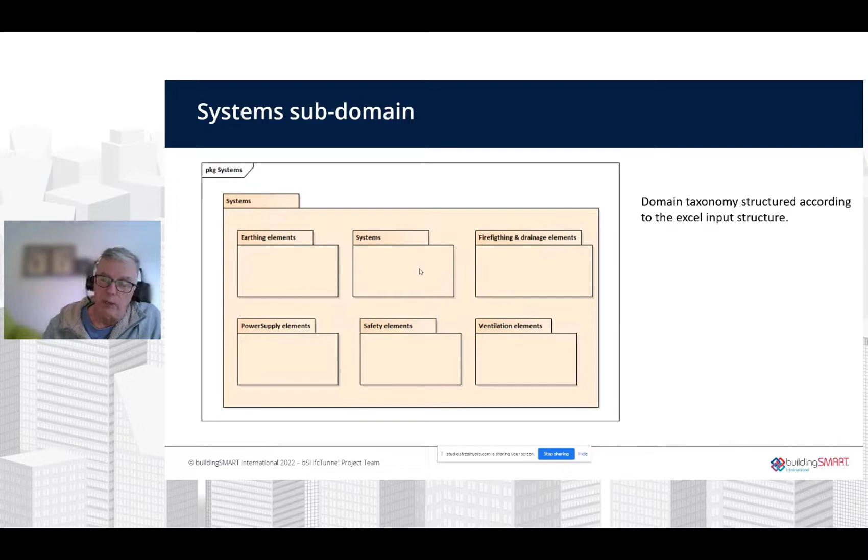As I mentioned before, there is a difference in IFC where you have system groupings, which are sort of elements of their own right, and you have then the individual elements that are grouped into these systems. This is a nice mechanism where you can actually use a single physical element in many system groupings, so a component can perform more than one function if you like.

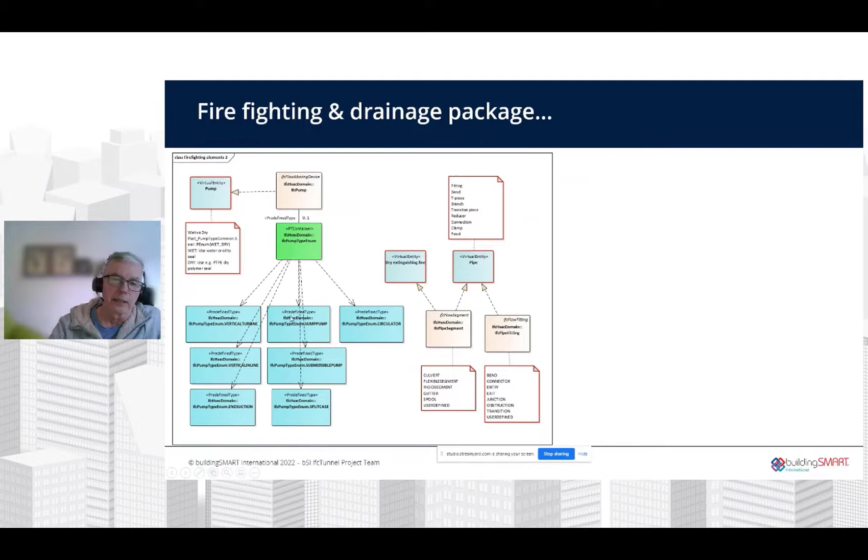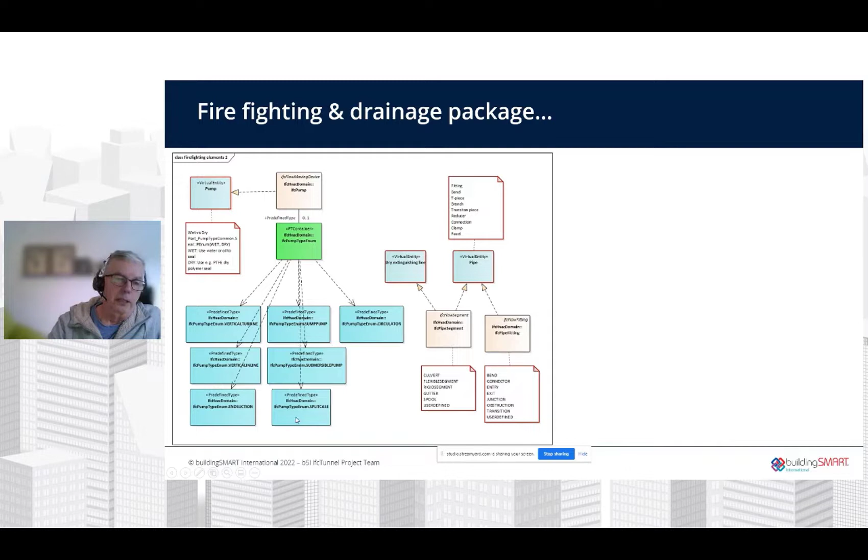And also here we have pumps. We already have pumps in IFC, and we have pipes in IFC, both pipe segments and pipe fittings, which we think we can use to cover the needs also for tunneling.

And then to the actual systems, when reading about fire protection on the web, we found there was a distinction between active fire protection and passive fire protection. Active fire protection is about detecting, stopping, and escaping fire, and passive fire protection is about containing the fire and preventing it from spreading further.

So what we propose is, because the current definition of fire protection system today talks only about a sprinkler system, which is of course part of a fire protection system, we would like to broaden the definition for this kind of distribution system to actually be about active fire protection: detecting, stopping, and escaping fire.

So it could contain sprinklers and also sensors and whatever you need to achieve this active fire protection. But then we also propose to add, as a kind of built system, a fire protection type covering more the passive fire protection, with walls and doors and things like that. So that's our proposal for firefighting and drainage.

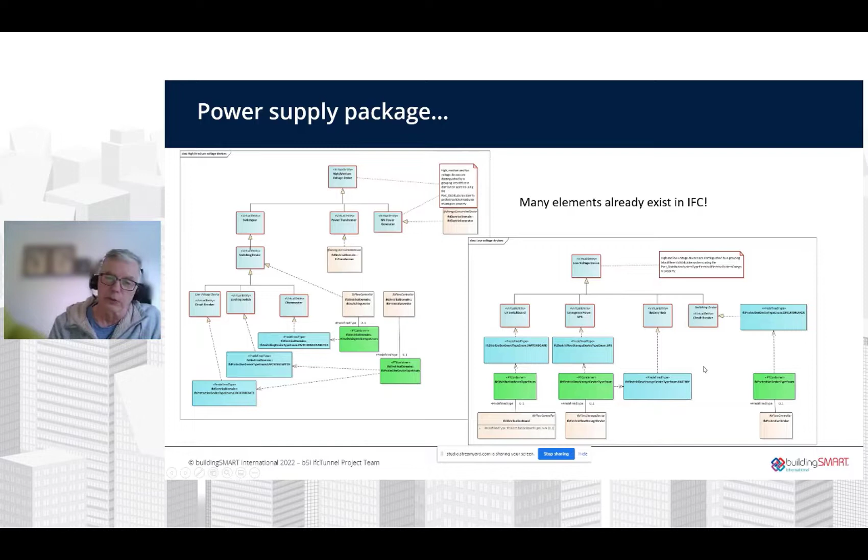And then cable carriers, segments, and fittings are already existing in IFC, as are junction boxes. Going further, things like switches and circuit breakers and power generators and transformers are existing elements in IFC, as are switchboards, UPS, batteries, and circuit breakers as well. So here we could just map it to existing elements in IFC.

Let me check the time. For power supply, we could use either electrical, or even, going back, power generation maybe could be used. But anyway, we propose to reuse existing definitions in IFC for this.

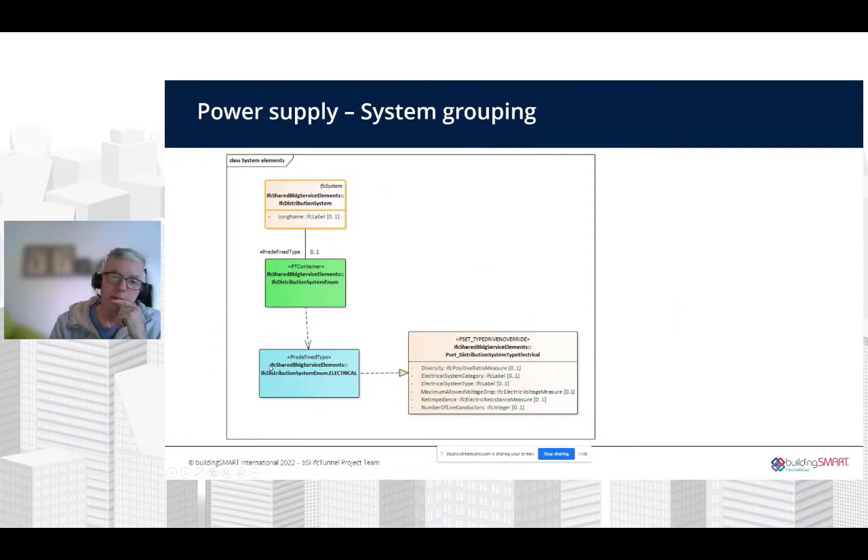Then we come into the safety package. We have things like doors, and doors are of course covered in IFC. There are things mentioned specifically for doors, like lock systems and anti-panic system bars, like this wide thing that you can push to open a door. There we actually propose to use property sets for going down to that level.

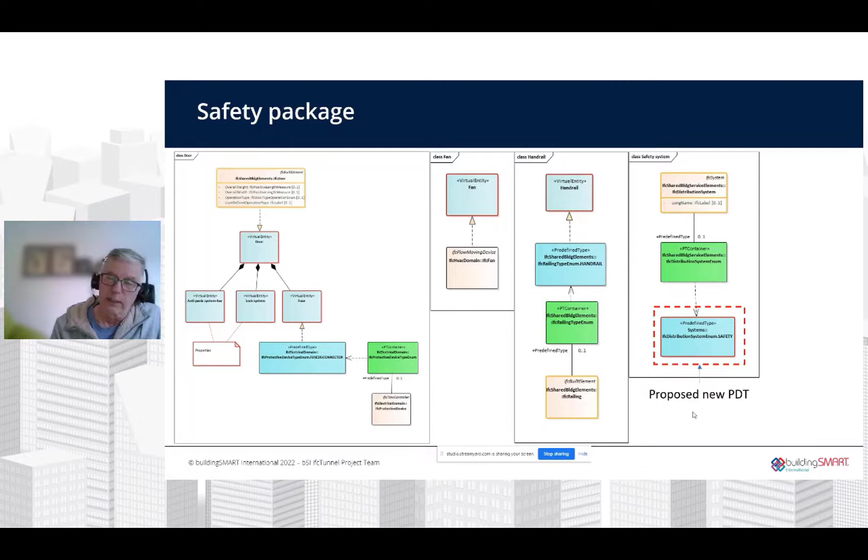But other than that, we have fans already covered. We have handrails already covered in IFC. And as I said, we propose to introduce this safety system as well, so you can group all the elements that together provide the safety functionality.

We also have lamps, and there are a lot of different types of lamps already in IFC. But here, things like lighting in case of evacuation, or permanent lighting, or arc lighting — this has to do with the shape of the lamp, that it can be seen from all directions, I think was the definition — in this case we propose to again use an existing property set.

We have the lighting system in IFC, and there is an existing property set for lighting, so we could add properties to that to describe whether the lighting is just for evacuation or if it's permanent, as an example.

More, we have things like tracking, which is about tracking people and vehicles and things like that. In IFC 4.3, a monitoring system was invented, and right now it's defined from an environmental perspective, but we felt that monitoring system would fit this kind of tracking as well. We feel that tracking and monitoring are sort of synonymous, so we would like to use that, but that's maybe not decided yet.

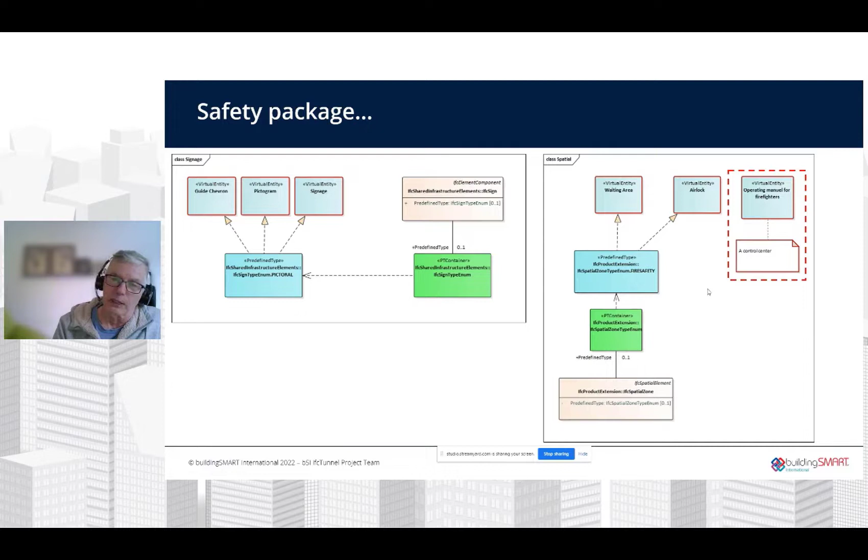All of those actually also exist already in IFC. We discovered that we needed to add the jet fan as a new predefined type for IFC fan, but all the other types were already covered. We already have IFC damper, IFC actuator, IFC sensor, IFC duct segment, and so on. So a lot is already covered by IFC.

As are also things like accessories, silencers, motors, things that were discussed here for fans in the domain group, also things like casing and impellers. We actually found that there are already property sets for fan that talk about impellers and things like that.

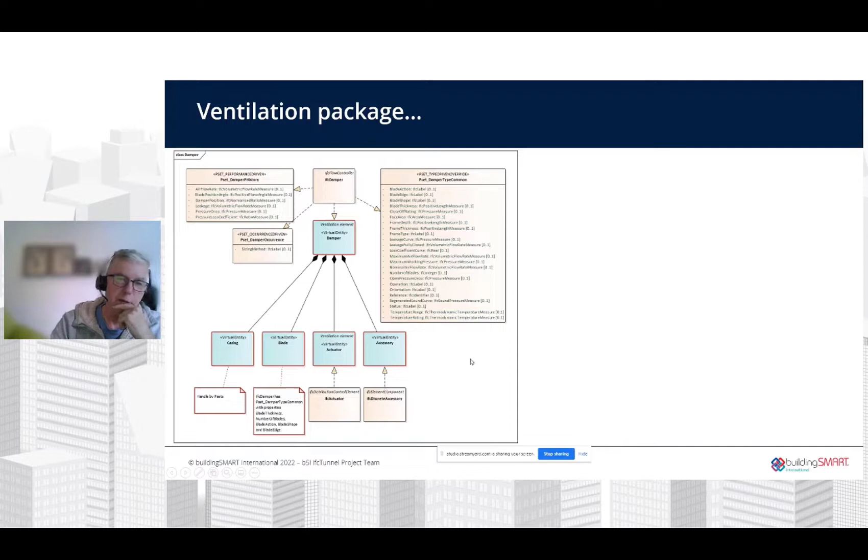That was very quick, and there will be no exam now, but we'll test people tomorrow after the second expert panel.